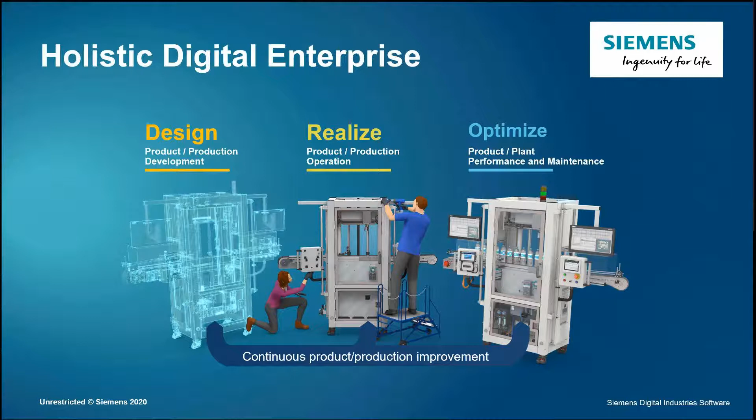We'll start with a question. Where can digital transformation take you? How can you use digital transformation to make your business more productive and more profitable? So there are typically 3 fundamental pieces to your business process. You have design, where you design the products. Then you have to realize those products, to actually make them through all the production phases. Then you have to optimize these products, typically in a long iterative process after you get them into the field. You also have to get data back and be able to figure out how to make these products better.

So these worlds that were kind of separate are gradually collapsing. Design, manufacture, and optimizing are all pulling tighter and tighter together. Think of the digital twin not so much as just a CAD digital twin, but also a manufacturing digital twin, where you take data back from the field in a tight closed loop and bring it back to help design and manufacture products better. This is what Xcelerator enables, the digital transformation. With the comprehensive digital twin at the core, the design, realize, and optimize we just mentioned, you have model-based systems, collaboration, and analytics to create this unique digital fabric, getting you to the future fast and predictably.

It's important to understand that Solid Edge is a lot more than a CAD system. Indeed, it's the best mechanical design system on the market, but what about the rest of the things you need to do as a business? Electrical design, simulation, manufacturing are

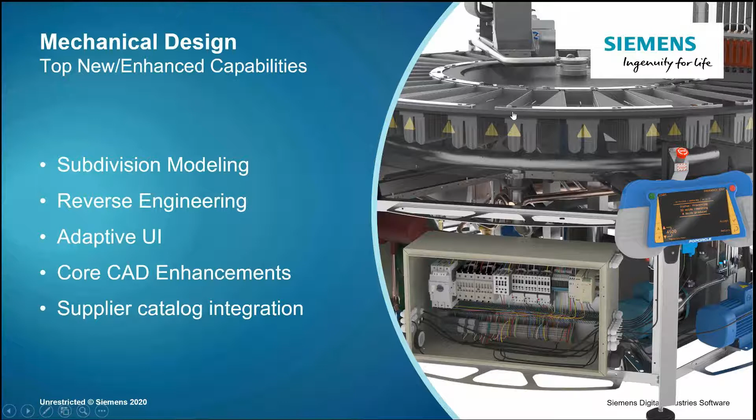So subdivision modeling, this is an amazing technology that allows anyone to create beautiful shapes. In the past, this was really the domain of a specialist who could handle NURBS and surfacing and all those complicated things, but now anyone can create these smooth and organic shapes. So let's jump into the Finamac machine and let's focus on the design of a portable controller.

Sub-D modeling enables you to develop distinctive organic shaped products without the need for expert skills and knowledge. So if you're not the best at surface modeling, for example, here's your chance to surprise your team. We'll start with industrial design sketches. We'll use these as a guide. So subdivision modeling can be simplified in 3 steps: the initial shape, the control cage to push and pull, and blend options.

We'll start here with a box shape and push and pull out the lower portion of the control cage. That gets a general shape of the controller. We'll start there. It's just a block, and we'll put in some starting dimensions. We can push and pull and get the general triangular shape of this controller. And after this, a split operation can be used to subdivide the control cage, which in turn gives us a lot more control over the shape of the body.

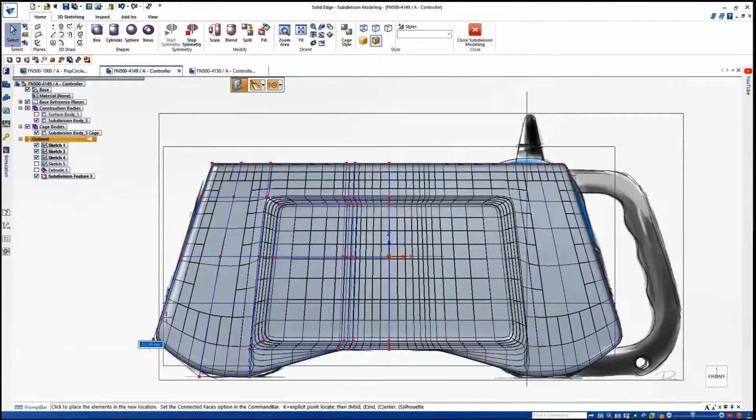Then, to create a cutout for the screen, a series of similar push and pull techniques are used to get our desired result. Many of the parts here need to be designed symmetrically, and to achieve this, we simply define a symmetry plane. Then, any edits made on one side of the cage are reflected on the opposite side, as you can see here. Anyone that's used synchronous technology in the past will be familiar with the steering wheel, which is equally at home here in manipulating the organic shape.

For the top notch of the part, we do a simple move face operation, which creates the geometry we need. And to keep track of what edges we blended and the value of each blend, we can show the blend values at any time for every edge and every vertex.

Well, we need to create a handle now. And we're not going to just cheat and pull something already done. What we're going to do is just do the same rectangular shape on the fly and see how easy yet powerful it is. Same as before, we'll grab an initial rectangular edge or shape, extend it, and then use a control cage to push and pull it into shape, followed by a blend operation.

Done. An important point we make here is we still use traditional Solid Edge tools, like the shape tool. We use that to split, and we can then grab those faces and thicken them. We can use Part Painter to color them so they stand out a little better. And you can still use any of the traditional solid modeling tools to further develop this model.

So we'll turn off some planes here, do some rendering, and within just a few minutes we've got a very complex model. Not bad. Now, I've been around the industry for a while, and I've seen what it takes to do this kind of modeling, literally days to do a model like that. To see it done so quickly, step by step in front of us, I think it's truly amazing.

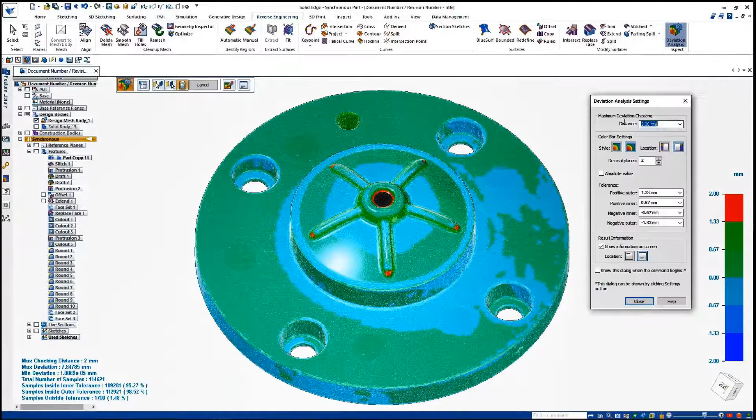So we'll take a look at this recent addition. There's a new Solid Edge toolset called deviation analysis. It allows you to measure the accuracy between the original scan and the resulting reverse engineered model, or even compare the two scans. The result plot color codes deviation for easy interpretation. Red means the test body exceeds the reference body, dark blue depicts negative distances, and on-screen callouts identify minimum and maximum deviation.

You can copy and paste this data for reporting later. Settings such as deviation range and result decimal places can be adjusted at any time, taking just a few seconds for the model to recompute.

So as you've just seen, there's some great new capability in reverse engineering. Deviation analysis can tell you how much the digital twin you've made from the real world product deviates from the model. Just as importantly, it's really, really fast now. Things that used to take minutes now take just seconds.

Adaptive UI. Now, this is a great new technology that we're pretty psyched to show you. It uses artificial intelligence to predict what you do next. How does it do that? It looks at what you've been doing in the past, at your patterns, and figures out what you might do next and presents those options to you. It's not just remembering your last 3 commands. It's really groundbreaking technology.

So keep your eyes on the top left of the screen. Solid Edge 2021 includes an artificial intelligence-based assistant in its user interface to predict the next commands you need based on what you're doing and where you are in a design. So for the Finamac machine, there's lots of sheet metal work. Solid Edge 2021 has learned from the design engineer, and rather than presenting tools that are commonly used across the industry, which would be good, it's presenting tools commonly used by this individual, which is excellent.

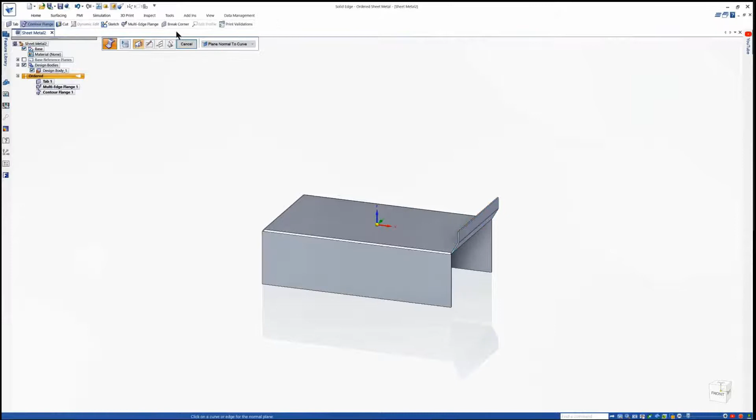That's right. So Solid Edge 2021 is now individually tailored to you. And what's more, it will continue to learn from you and dynamically improve how it holds your hand through your work day to day. What's really interesting here is watching it dynamically present the next selection of tools, even across different environments, as we go from sheet metal to sketch and back, presenting specific commands.

I said at the start to keep your eyes on the top left of the screen, and notice there's just one toolbar there. That means you can remove the other toolbars and maximize your workspace to have what you need right there, ready when you are.

So, as you saw, we're harnessing the power of artificial intelligence, and you can see how it can be applied to your daily work. It's personalized for you, it actually learns from you. What it does the first day of usage versus what it does after a week will be different because it learns as you go. Great thing about it is you can also share it with other people in your company. Maybe your process isn't the exact same as others, but you may have similar work that you all do. You can give them a head start in learning by sharing your piece with them.

In the area of core CAD enhancement, we have a lot going on. As I said earlier, there's no way we can cover the depth and breadth of Solid Edge 2021 in this short update, but I want to show you a few things that would be really valuable in the day-to-day work for the stuff that you do every day.

Let's jump back into the Finamac Popsicle machine. Actually, the name of this machine is Pop Circle. Get it? Anyway, first off, we're using large assembly mode to make the most of our computer's resources and to keep things performing as we'd expect. There's more to help with performance here too.

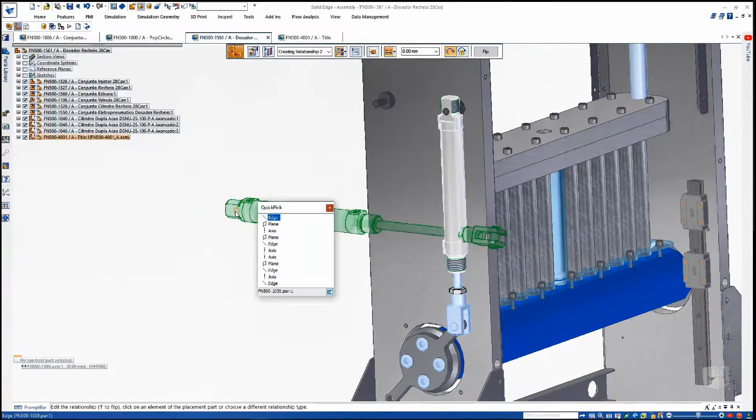It's common practice for suppliers to provide a 3D file of purchase items, such as a piston assembly. Using the new internal components option, all separate parts are contained within a single assembly file with no parts written to disk. This enables faster import times, especially on large data sets. Even though these parts are internal, they can still use traditional operations, such as taking measurements or analyzing mechanisms. Here we see the correct operation of the piston assembly with its internal components. Further, you can then assemble this as if it were a regular assembly. All in all, it provides increased performance and a lower consumption of system memory.

Reusing designs is even easier now. When copying and pasting multiple parts and assemblies between designs, existing assembly relationships are automatically captured and reused in the target assembly. A step-by-step process guides you through the operations to add assembly relationships needed to fully position the parts. All internal relationships come along for the ride. This significantly reduces time for these operations.

There's a new multi-edge flange command that speeds up the time when designing sheet metal parts. Multiple edges can be selected at the same time. Angles can be defined and miters can automatically be added. It's as simple as picking the edges and then pushing or pulling. In addition, partial or center flanges can also be defined, and trim options can make easy work of tasks that would normally require multiple operations, even when offset or gap distances are required. These sheet metal enhancements, along with many others, increase productivity and efficiency, being able to design parts faster and easier.

There's a new decal command. It makes it quick and easy to add labels and images onto parts. Simply select the desired image, define the desired size, and position it accurately using regular sketch relationships and dimensions. A decal can span multiple faces, as we see here. However, to change the position of it, you simply modify the dimensions or the relationships.

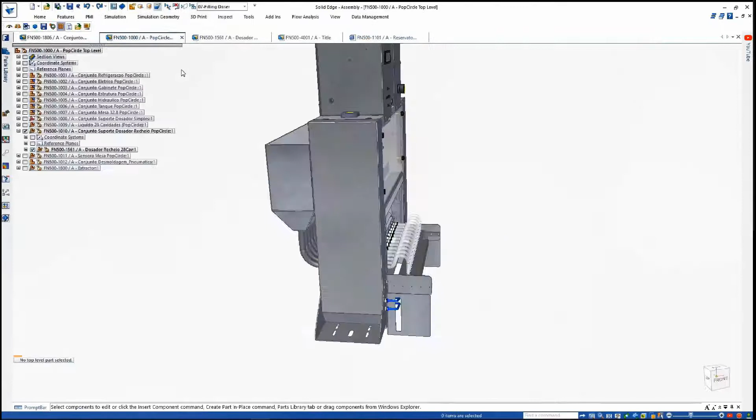Solid Edge 2021 also includes enhancements in frame design. Here we'll place a cross section which has coping applied so that it matches the circular cross section of the vertical frame. Now we can specify a weld gap between the frames, and this is especially important in generating an accurate cut length of welded frames in our parts list.

A new end caps command also allows quick definition of these types of parts within a frame. The single command now provides a wide range of options. Simply select the frame cross-section, choose the material, and specify the type, choosing from different types like inward or outward, or even define offsets that have chamfered corners. The end caps are reflected in the bill of materials, eliminating any additional work.

There's some truly great stuff in here, and this is just a bit of a preview. On large assembly performance, our customers are making larger and larger assemblies all the time, starting with a smaller assembly and getting bigger and bigger. Suddenly they're doing a machine, and the next thing you know, they're doing a small factory. We're keeping up with that, continually adding capabilities to go bigger and bigger.

Internal components—this is an awesome feature. Today it's used for importing parts, such as an engine block or engine assembly that has 300 parts in it, and you can add that to another assembly without worrying about all the individual part files, because you may not really care about those, and maybe they came from a supplier. The internal components technology will allow us to leverage this in the future to do more exciting things in coming releases.

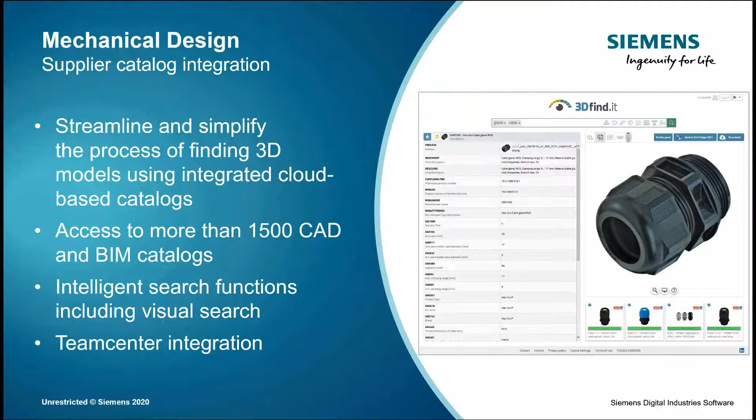The folks at Ditch Witch were very excited about this. The integration allows them to save a lot of time, not having to build parts or rework parts, and just simply use what they already have.

There's a lot of other stuff here in mechanical design, more than we could possibly cover—we'll invite you to look at it more deeply. But Solid Edge is not just for mechanical design. As we were talking earlier about the digital twin, you should really look at your business and think, not only how can I be more productive with mechanical design, but how can I expand my efforts? Can I go further in my production process, or can I go sideways into electrical design? What ways can I become more productive as a company by using the tools that enable digital transformation?

There's a lot of talk about electrical design. First is wiring design—it's a really important thing coming here in Solid Edge 2021, and that's cabinet and panel design. It's a different thing when you're wiring a tractor or a car than it is when you're creating industrial control panels and cabinets that go into the machines that you design.

We have a full complement of tools here. We're going to check these out. So here we are in Solid Edge wiring and harness design.

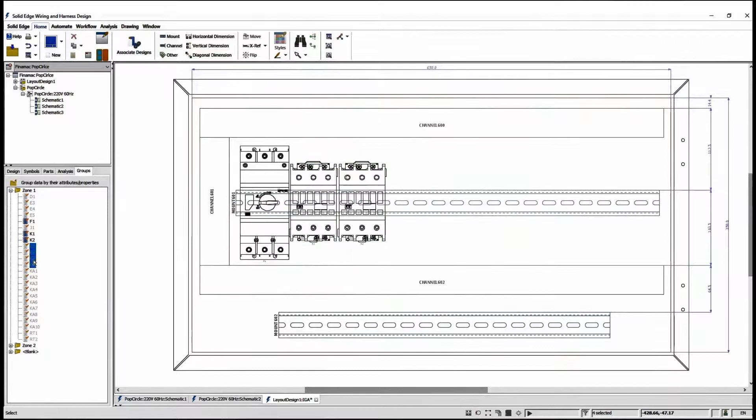We can place single objects or multiple objects at the same time, and shortcut options also allow control over snap points, rotating angle, and the order of the placement, and more, all of which are dynamically previewed during the placement process. The last few devices are placed in the top and bottom rails quickly and easily.

A bill of materials, which is customizable, has been automatically built, and we've added the devices to the layout design. A bill of material IDs can be generated with balloons.

Finally, for the panel is a terminal plan, which assists in the assembly and wiring of the terminal strips. The fully associative terminal plans are automatically generated, documenting the terminal blocks along with their specific symbol, physical sequence, and the strip, and the details of where the wires terminate to both ends of the block.

Now that the electrical design and documentation is complete, we can finally share this with our MCAD team. The connected mode makes it easy for the ECAD and MCAD worlds to collaborate.

Switching to Solid Edge 3D CAD, we can see the existing wiring details that have already been added to the design. With the connected mode active, we can cross-highlight components between the two disciplines.

We'll bridge in some of the final conductors to connect the two cabinets together. We can bundle these wires together.

And to keep the bundle neatly organized within the assembly, there's a new route-along-surface command that provides a very efficient way of routing the bundle path around the contours of the frame.

All that's needed is to pick a bundle to be routed, selecting the faces of the geometry the bundle needs to follow, and plot some points along to define the path. Then route the ends of the bundle through each of the glands to the respective cabinets.

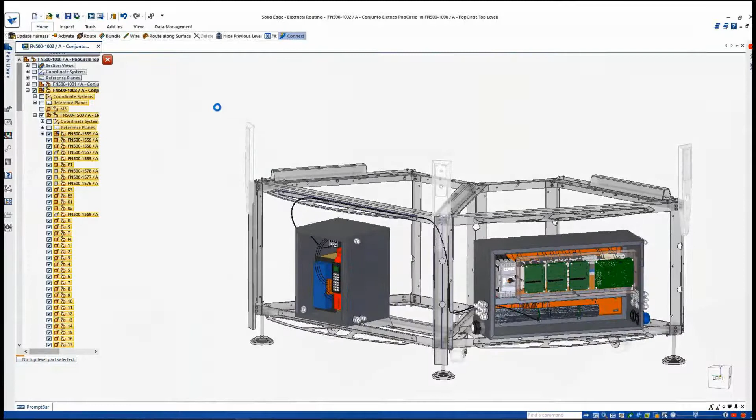Just watching that is impressive. The amount of productivity you have in terms of laying out the cabinets and panels is pretty remarkable.

If you're working with something that's using a more manual technique, you're going to find that this will add some serious productivity to your day.

What you saw there, first of all, is that customizable table-based interface for the device snapping to the rails and so on. We didn't get a chance to look at it, but there's also an auto-routing capability for schematics that will save you a lot of time.

And of course, it's all upward compatible to the Mentor line of products. We got a glimpse of routing along irregular geometry. It can even be a sculpted shape, maybe something you did in subdivision surfaces.

Connected mode in electrical routing has also been extended. And that's not only working with Solid Edge wiring and harness design, but it also works with Mentor Capital software. And finally, we have an integration to other third-party products as well.

In the area of harness design, to be clear, when I talk about harness design, I'm not talking about the 3D efforts that mechanical engineers might think of. Harness design is also something you do in 2D. How are you going to lay out the harness for production? When we talk about harness design, that's what we're talking about here.

You have the ability to visualize this in Teamcenter as well as tie it back to requirements. It enables tracing of the requirements themselves. And it also allows interactive routing for the full signal path.

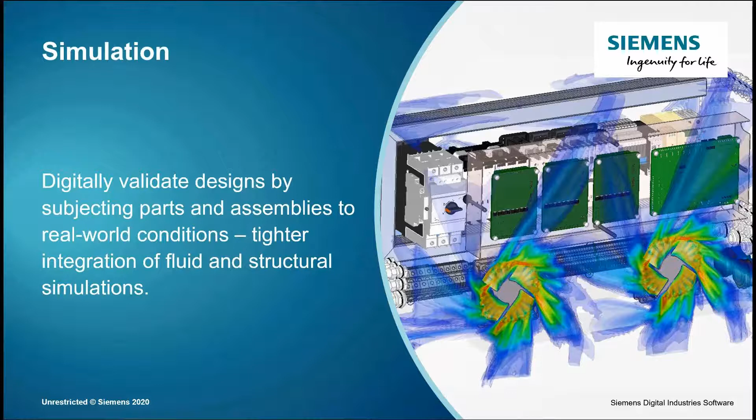Next up is simulation. And of course, there's a lot going on here. We have products for stress analysis, modes and vibration, all sorts of different things, and flow analysis. You're going to see some great integration between our structural and flow products happening in Solid Edge 2021. So back to the popsicle machine. Simcenter FloEFD for Solid Edge features new capabilities and modules for electronics cooling applications.

The new package creator specializes in the rapid creation of accurate thermal models of electronic packages with correct definition of chip layers and solder balls on the chip. Here we can clearly see the thermal effect on the PCB board and in turn its effect on the overall electronic enclosure. Looking at the flow trajectories around the fan, this shows how the fan swirls the air and pushes it to the side to cool the enclosure.

We can also see how the fan is performing along the fan curve, showing the operating point of the individual fans based on the fan curve data from the manufacturer. So ISO surfaces are another way of illustrating where the airflow is going and showing the velocity and the volume plot. In addition, Solid Edge 2021 now has the ability to apply the results from a computational fluid dynamics study as input to a Solid Edge structural or thermal simulation study.

Focusing on the tank containing the liquid bath that freezes the popsicles, looking at the results of the thermal flow study, we can see how the cooling liquid interacts with the assembly. And these results can be sent to Solid Edge structural simulation by using the export results command. So let's go to the structural analysis setup. Also new in Solid Edge 2021 is the ability to suppress and remove any components directly from the simulation pathfinder, making it easier to test the design on a subset of study geometry.

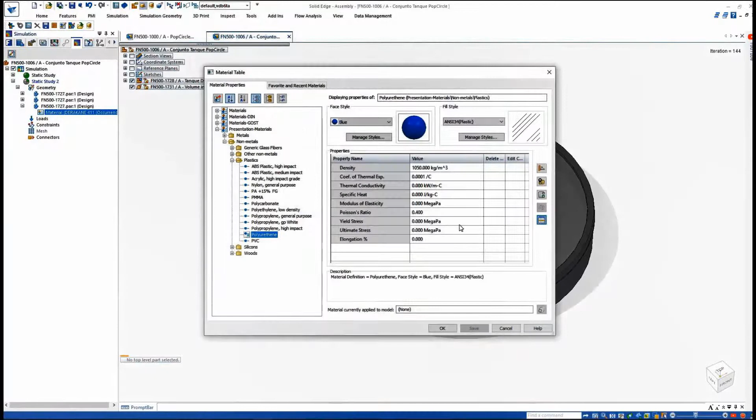When defining the material for the insulating core, another new feature is the ability to highlight key materials that are required for the study we are attempting to solve, as can be seen by the green coloring. It makes it easy to ensure we have appropriate properties defined for an accurate study. The last step before solving our structural study is to import the FloEFD pressure or thermal results. These are automatically applied directly to the correct bodies and faces in the study.

In the result, we can see the pressure from the cooling liquid is causing the highest areas of stress on our design. And it doesn't stop there. New for Solid Edge 2021, the ability to probe edges, ultimately saving time in having to select each individual node.

Like I said, I've been in this industry a long time, and I'm still amazed at some of the things that I see. The features around flow simulation, the integration with the stress simulation, is just utterly amazing. We continue to enhance the Solid Edge simulation in many ways, improving the interaction with the materials, making it easier to remove components from the study, being able to probe the geometry more easily. But really, that ability to tie the flow and structural together, that's impressive. We're able to take the information from the flow and read it directly into Solid Edge for, let's say, stress analysis.

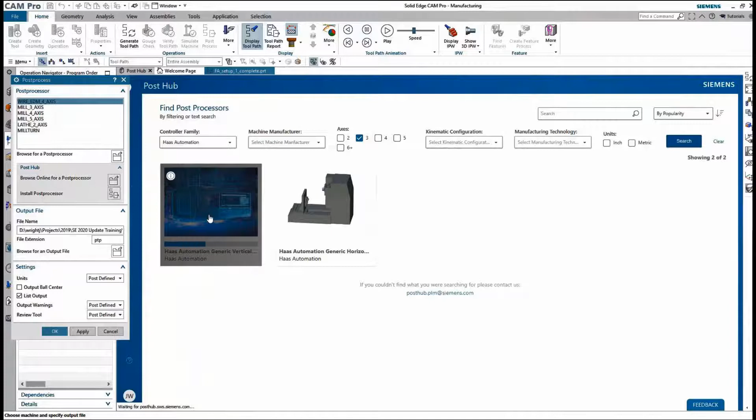With new posts added regularly, the Post Hub is searchable with filters for machine type, manufacturer, controller type, and kinematic configuration. Once the desired post processor has been selected, it can be automatically downloaded and installed, and verifying the post output is simple.

Solid Edge CAM Pro now has multi-axis roughing, which is a great tool for quickly removing stock from aerospace parts, like the one shown here. Multi-axis roughing uses adaptive roughing technology to machine parts in the most efficient manner. Viewing the multi-axis roughing path in replay mode allows visualization of the tool axis tilting as the cutting tool removes the material. The 3D dynamic simulation option shows the tool motion and concurrent material being removed.

Now notice how the multi-axis roughing efficiently removes material without ever burying the tool in the cut. That's obviously extremely important for efficient machining. With machining simulation, users can view the actual machine motion, which delivers a very high confidence level and is necessary for complicated multi-axis machining centers. Solid Edge CAM Pro supports G-code-based simulation, meaning the virtual machining center is acting upon G-code just like the real machine would.

We continue to push both additive and subtractive manufacturing forward. You can see in the new Post Hub library, getting access to proven posts for your CNC machine tool has been a constant industry issue, and it's much easier now with the Post Hub library. You also saw multi-axis roughing, and that's really state-of-the-art stuff. We've also included some things in additive we didn't get a chance to look at, but we are providing better material selection for your printing needs, and bringing various additive checkers into one comprehensive additive checker makes it a lot easier to interact with.

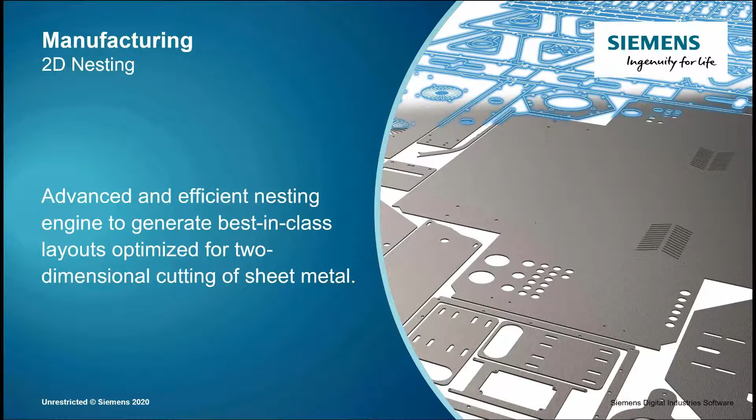Oh, back up here. Another part of manufacturing is nesting. A lot of what you do is sheet metal. We talked about sheet metal earlier, and the ability to lay those sheet metal parts out in the most efficient way possible. We have the most efficient algorithm in the industry for doing just that, and we want to talk to you about some of these new enhancements in that area.

If your machine looks like this, consisting largely of sheet metal parts of varying materials and thicknesses, you'll really benefit here. So jumping in, Solid Edge 2D nesting can now search the complete assembly for appropriate sheet metal documents, automatically sorting the parts by material, type, and thickness. By selecting the material type and then thickness, you can quickly make patterns for multiple jobs, enhancing shop floor efficiency. Flat patterns are then automatically extracted from the parts, saving valuable time.

The assembly occurrence now automatically defines the part quantities, while the job multiplier quickly calculates the amount needed to manufacture multiple machines. Solid Edge 2D nesting supports multiple sheet sizes. Standard sheet sizes are stored in the library, and you can easily define your own custom sizes. And here, Solid Edge 2D nesting is doing its thing, finding the most efficient use of material. Savings in the material costs are also gained by the highly efficient algorithm and could quickly offset any of the software investment. And last but not least, 2D nesting has a quick cost estimator.

From user-defined costs per square meter or yard, 2D nesting quickly generates an accurate cost of material that is needed for job cost accounting, quoting, and inventory processes. 2D nesting is a great opportunity to improve your sheet metal process while saving money. As I said, it uses the most efficient algorithm in the industry, and we've enhanced it to deal with odd-shaped sheets, like in the upper right corner here.

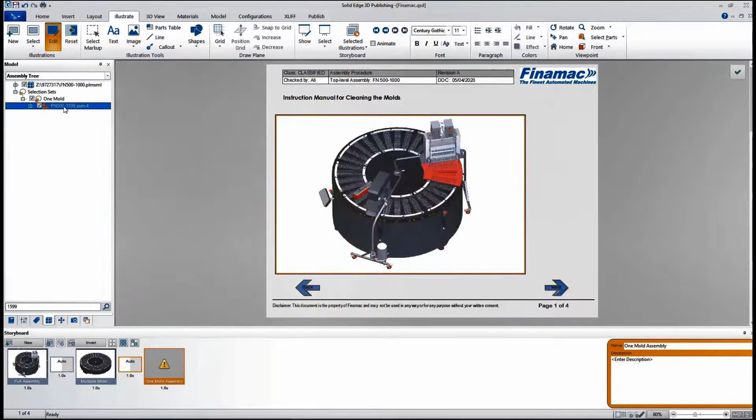The new selection capabilities in Solid Edge TechPubs allow for the organization of groups and parts and subassemblies into named sets, making it easier and faster to select or hide multiple parts at the same time. Here we'll focus on a single mold assembly and build a document that describes the cleaning process. The new View Carousel function makes it easy to navigate through the illustrations with a storyboard.

Creating an interactive view is fast and easy. Here we can accommodate multiple 3D views on a single page. Selecting a part on the right displays the view on the left. The next page includes step-by-step instructions for cleaning the mold assembly.

The best way to visualize the process is to mimic through the exploded view with dynamic text-based boxes providing instructions. Adding buttons to step through the process is made quick and easy by using the new manual markup resizing options. Now, not only can you import all native Solid Edge exploded views, but you can also create custom exploded views within Solid Edge technical publications.

Adding an interactive parts list is as simple as drag and drop. The parts table is automatically displayed based on the 3D model's metadata or properties. A new powerful and versatile parts list editor makes it easy to customize the table, and adding an illustration allows us to quickly switch between the collapsed and exploded views of the mold assembly.

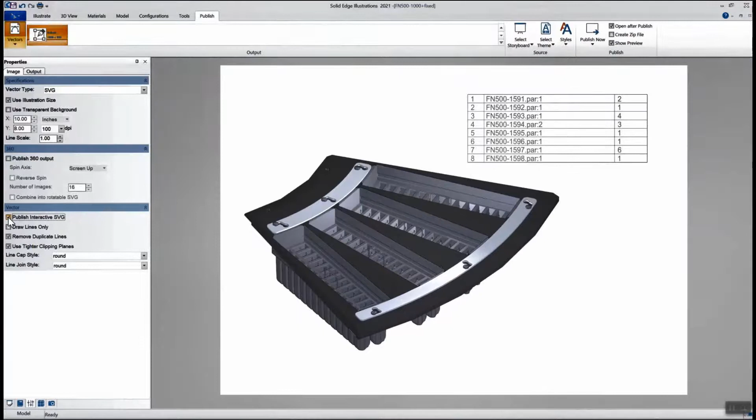The project can be published in industry standard formats such as 3D PDF, and in this case, HTML5. The rich interactive document can be viewed on any web browser without additional plugins. With the new 360-degree publishing, get an all-around view of your product. The automatic functionality allows for more robust presentation of your design, a great way to capture images for product and stakeholder meetings.

Clickable SVGs is another new feature that allows us to publish an illustration with interactive SVG, scalable vector graphics format. When a part on the model is selected, the corresponding row in the table will also be highlighted. And furthermore, being SVG, it's very crisp and very clear.

With technical publications, we see that you can take advantage of your data, the data that you have today. Customers have generated literally millions of parts, some upwards of 15 million parts, and the ability to use that in your technical publications directly is very valuable. We have faster performance now integrated with Teamcenter as well. And what you saw are some great new features, the carousel page object, the 360-degree publish. All of this is great stuff in Solid Edge 2021.

This leads us, of course, to data management. As I say, you've generated a lot of data. Whether your company has 2 seats or 200 seats, we have you fully covered with our scalable data management solution.

So let's take a look at the new concept modeling workflow using the popsicle mold. The concept modeler is a space where a designer can explore new ideas without committing the files to Teamcenter. It's a sandbox where you have the freedom to make any changes to a design without compromising the existing models. Here, we'll create 2 concepts of our design.

Going back to the concept assistant, we can switch the concept and open the design data. Here we can assemble the different mold retaining components for this idea. Once the concepts are finalized, the data can be sent to Teamcenter. The concept assistant helps with this process and provides options to filter for new or modified components, or even revert any changes that were made.

The 3D Compare tool allows us to quickly visualize the changes between the concept and the server versions, and the user has full control over the actions for any modified component. Once everything is defined, the data from the desired concept is seamlessly sent back to Teamcenter.

Also new in Solid Edge 2021 is the integration of Solid Edge model-based definition content. Now, the downstream manufacturing information included in the MBD PDF output is automatically captured by Teamcenter and visible within the item revision of the part assembly.

In Solid Edge built-in data management, there's a new Open As command that allows users to control exactly how a file is opened from either Windows Explorer or from the most recently used menu. This allows full control over how an assembly is opened, such as defining the correct configuration, setting read-only status, applying large assembly options, and much, much more.

There's a new shape search capability that allows designers to more efficiently reuse existing models and prevent recreating designs from scratch. You can simply use an existing part or even model a basic representation as the basis of shape search. Solid Edge scans an available database for similar looking parts, and filters are available to approximate the match criteria.

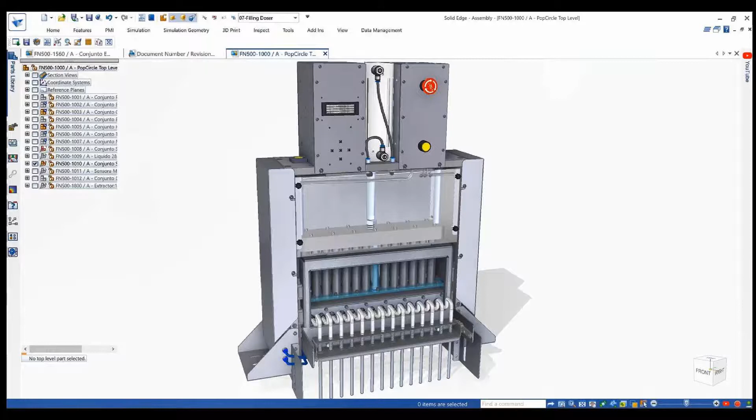First up, there was Shape Search, a new product that allows you to reuse the data that you already have, and there's nothing more inefficient than recreating something you've already designed and built. But you've got hundreds or thousands of parts, or maybe even millions of parts, and how are you going to know where they are? Well, the way you're going to know is through Shape Search.

We've also enhanced Pack and Go, which is a very popular Solid Edge feature, allowing you to trace links even outside the current context. The Open As command is super handy, and it may not be super obvious at first. For example, if you want to open an assembly with a certain configuration, you can do that easily from the file manager. This is good stuff for everyday use.

Inside of Teamcenter, the concept modeler is really great new technology, such as being able to make changes to try out what-if scenarios without committing to the part number or deciding if it's a brand new part or just a revision of an existing part. Wire harness and alternate position assembly can now be visualized in the Teamcenter portal. And the local component support of Solid Edge is fully integrated into Teamcenter as well.

Next up is cloud-based collaboration. More and more, we see our customers around the world having to collaborate across their businesses in different locations, and collaborate with customers and suppliers. The cloud really enables this. There are really some very cool new capabilities in cloud-based collaboration. So let's take a look.

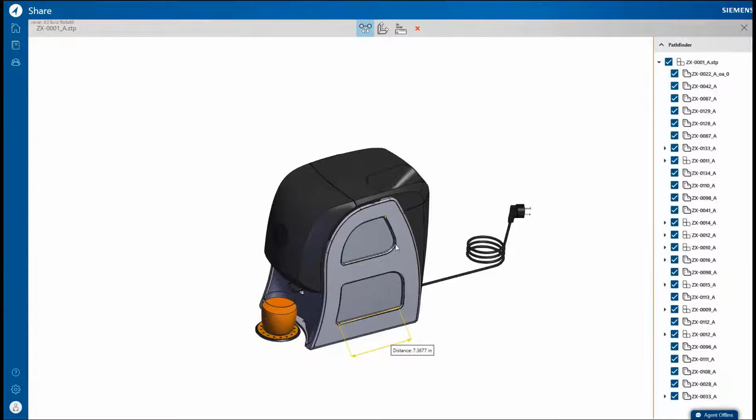Notice how easy the interface is, what we call non-technical. So it's not just for design engineers. It could, for example, be used in a sales situation, and it's nice and easy to get to any of the product features. Here we're taking measurements on the fly, and we can also change the units on the fly as well. And in this interface, you can also add markups or commentary. There are some tools to do some redlining.

We can choose pre-selected shapes, or do some freehand sketching over the top of the 3D model, and include text annotations as well. Any of these markups get recorded in the tree. What's great is you can start a conversation back and forth about any issues you're tracking, whether positive sales points or manufacturing difficulties. It records the markup and the time when it was made.

I talked about getting data into your cloud storage. We looked at upload into the browser. Also available is desktop synchronization. This multi-CAD project we've got on our desktop is represented simply as a folder. Any data we bring into this folder we can drag and drop in, or just save it right from Solid Edge. This will get synchronized in the background as you work in the app.

Another great capability of this app is sharing with whomever you like. It's nice and easy, just type the email address of the person you want to share with. You can choose the access permission or access level you want to grant. For example, you may choose to view and download, or protect your intellectual property.

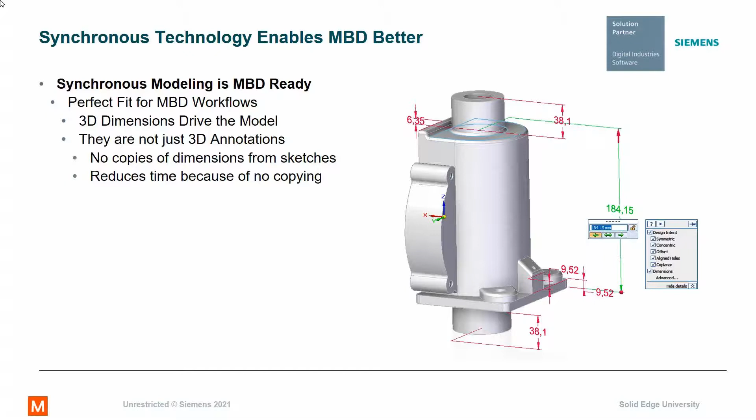So of course, any changes to the 3D dimensions are reflected in the part model. Very, very tight connection between the dimensions and the actual model.

Now for you that are still working in ordered modeling, maybe the products you design are more suited to that, and that's okay. Or if you just haven't made the leap, you can use copy PMI in the ordered modeling environment to create an associative copy very quickly of those sketch dimensions, and they become PMI dimensions. You see they have a purple color, but what's kind of nice is that the PMI dimensions can be arranged more visually pleasing, more appropriately, while the driving dimensions - typically you're most interested in just simply driving the model. You're not really thinking about making it human readable. So it's kind of nice to actually have them separate.

And you see that the tolerances also retrieve really nicely. So it's one and done - you do it once in your sketch and you can very easily retrieve just the dimensions that you want for PMI use and model-based definition use.

So now we'll do a short demonstration just showing some basic PMI modeling. All right, let's take a look at some PMI, product manufacturing information.

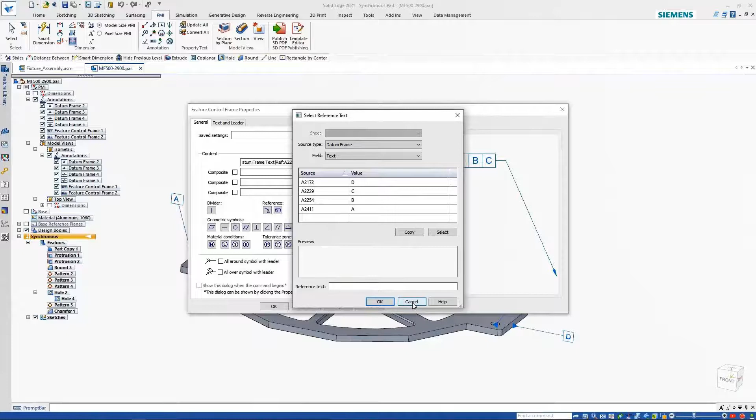We have a feature control frame, and if we touch it, you'll see that all the datums highlight. That's because there's associativity - when the datum was created, they used this reference text, and now that's in drafting, and it's also supported in part modeling. So essentially it offers you all the other annotations that are in the drawing that would make sense for a feature control frame. And the bonus is, besides the fact that it sees all the associativity, if you ever make a change to one of these annotations, it's reflected in the feature control frame immediately.

You might have noticed that change to a D. So you don't have to remember to go and update, and you don't have to take the extra time. It's much better than manually typing these datums into a feature control frame.

I'll hide my PMIs. There's a really nice capability where if you touch a face, working in Synchronous, it exposes any dimensions attached to that face, which is great. You can also right click on one of these dimensions once you see it and add it to a model view, or remove it from a model view. So you don't actually have to go find it here. If it's not displayed, that's just natural behavior of Synchronous modeling.

One thing I noticed right off the bat is that these are just cylindrical cuts. They're not actual holes, which isn't probably the way I would do it. I like to have real holes with real data.

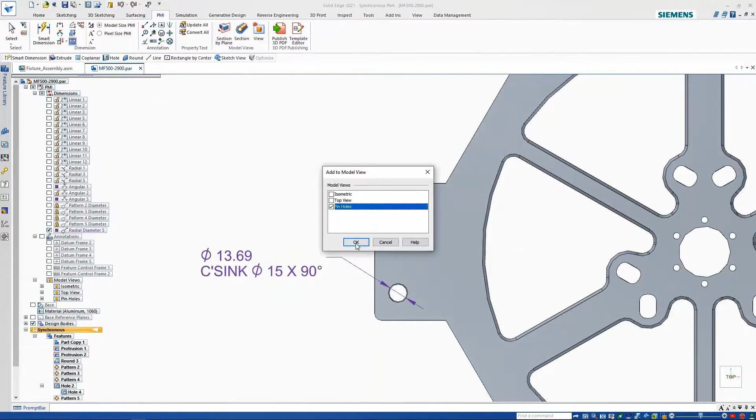And if I apply my Pin Holes, it takes me there. So super easy. And remember, you can just touch a face. If I want to include this, I just add to model view, pick the Pin Holes, and it's added to it. I'm going to turn it on. This is a little ugly, so I'm going to move it. Maybe I'll put it down here. So now that will be part of the model view. And if I apply the view, you can see it's just that easy.

So that's the first demonstration, a little taste. We'll talk about publishing and the template editor in the next movie.

This is the interoperability demonstration. You can transfer PMI data from Solid Edge models. It will happen through a PLM XML adapter if you simply open a Solid Edge file directly. And there are some settings that will impact that as well.

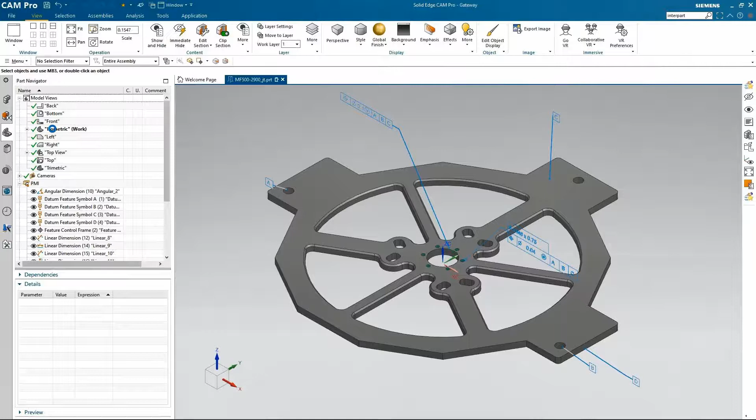And even though they don't display initially, they are also here in the PMI collector, and they're gathered into the model views, almost the same as Solid Edge model views. So if we double click the isometric, there's the PMI that we had in Solid Edge. Here's our top view. So very, very similar, very good interoperability between Solid Edge Cam Pro and Solid Edge itself.

Solid Edge continues to build on what's been in the product for a long time by adding MBD. A nice capability is the way reference faces can be selected and attached to the callout, or in this case, a feature control frame, so you are sure as to just which geometry the annotation refers to.

PMI is supported in STEP now as well for foreign export and import. And of course, PMI has more than just text. It's got data in it that can be leveraged in Solid Edge Cam Pro to help you manufacture your parts.

So MBD is a set of tools that add on to Solid Edge, a little bit different than technical publications. Tech pubs are usually used for marketing and manuals, so they're a little richer, but this is a great way to create documentation for things like manufacturing. It is a purchasable upgrade for Solid Edge, but it's very easy to use.

We have a couple of buttons here for publishing and your template editor. Publish is super simple, creates PDF or HTML5. Template editor is basically Solid Edge drafting with a few controls that are specific to PDF navigation, so there's no need to learn another application.

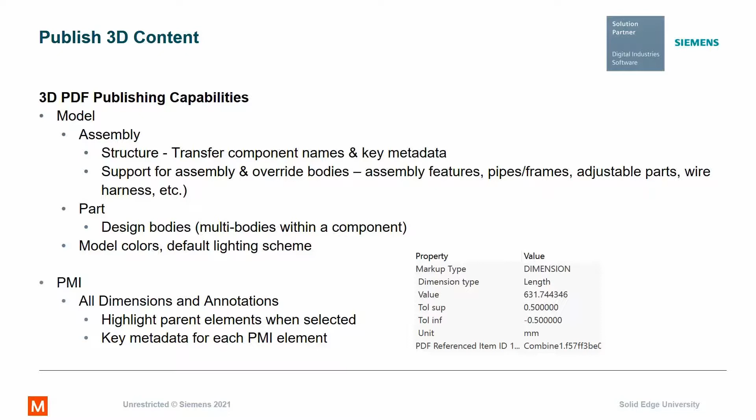Let's take a look at Solid Edge MBD. Maybe I'll go ahead and create a feature control frame. I've clearly run through this once before, but I have a true position to B. I've used the reference text, so it's going to be intelligent to the B datum. And remember, we talked about this reference geometry, so you can have more geometry than just the one.

Roll up on that a little bit so you can see it better. Picking the cylindrical faces and then just accept, and then the face where I would like to attach my feature control frame. So if I get that done and I escape out of it, when I come back and pick it, you see not only is it highlighting the datum, but it's highlighting the faces as well. So it's very nice, and we'll add that to the model view all and hit OK.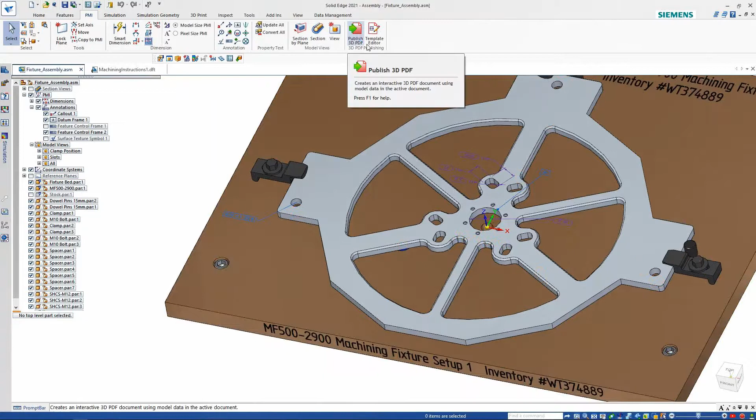And go ahead and save that. So to publish it, it's super easy. You just click the publish button, but if you wanted to make a template or edit a template, you just click the template editor. And really it's Solid Edge Draft, except you have a number of extra controls here.

You have a 3D view, carousel for navigation, your bill of material, table, generic table, and a text input field. So this is the one that I made a little bit earlier. There's my 3D view, there's my BOM table. I don't think you need to see me kind of drawing these and organizing them. So there's a simple callout that I added, and a callout with property text. So very easy to use.

I'll just choose to not save that, and I'll abandon the creation of my template. But right from Solid Edge now, I could choose publish template. My machining instructions template is the one that I want to use. So I just select that. I wanted to open the PDF, not interested in HTML right now. I think I want the 'all' to be the default view, and we just choose publish.

And we'll go ahead and overwrite that one that was there. Runs pretty quickly, and we should see a PDF open up with my custom template. So there we go. And if you use your navigation down here, there's the clamp position, there's the slots, there's the all, there's my highlighting of the clamps and the stock. There's the actual part and a number of other views.

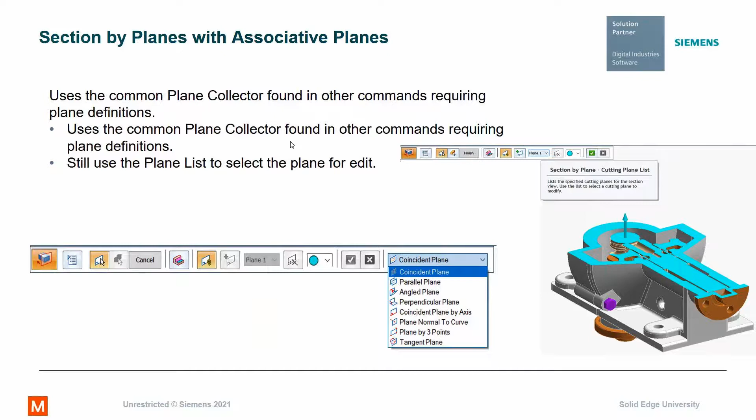So in the last demonstration, you saw a little of the section by planes with associative planes. Very easy to use, nice addition. They land in the planes collector found in your Pathfinder. You can see you can use multiple plane types. So these can be associative or non-associative. You can select which parts get cut. You can have multiple cut planes. Very nice.

Center mark annotations in PMI, of course, just like you have in drafting. So we need that same functionality for model-based definition because we're essentially creating a paperless way of communicating the information. Supported in the 3D publish, of course, and you can dimension to them if you like.

Bolt hole circles, yet another thing that we have typically had in drafting for a very long time, is now available also as a PMI annotation and can be inserted into your model views, just like in drafting, and also supported in exporting in the translators. Center lines, very similar, and well supported as well.

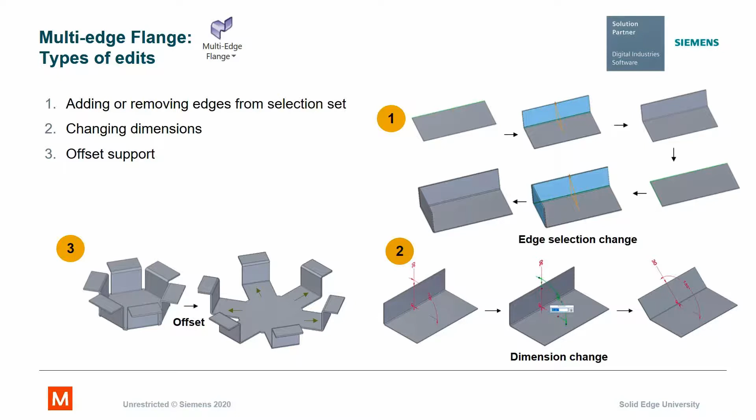I'll show you this in the demonstration. Again, really easy. Select your edges. Can be a chain if they're all contiguous edges. And offset is supported as well. Corner treatment. Good example there. On the right, simply editing the options dialog as you'd expect with sheet metal design.

And the ability to automatically trim if they intersect. So that is nothing more than a single click. And if any of the flanges intersect, it just automatically trims them. No guesswork, no clicking around. Just if they intersect, they get trimmed. Supports coplanar and non-coplanar, as you'll see in the demonstration.

All right, notice I'm in the ordered mode. Multi-edge flange is right here. We'll just select the edges. You can easily hold the shift key down and deselect if you misclick, because we have radii at the corners. You see it's super easy to just play with your command bar like you're used to with the traditional flange command. Very easy to discover.

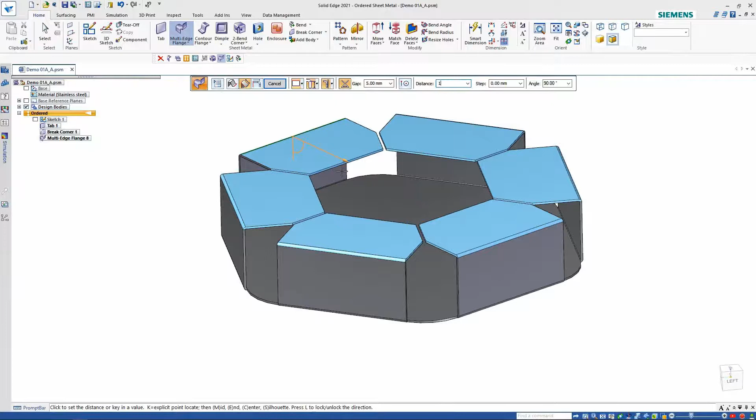I want to show you how the intersection behaves in the automatic trimming. I'm just going to right click and move in. So whenever you have any intersections, it's a simple single click, super easy to do. Maybe we'll give it a little gap. Also super easy to use, and that pretty much covers it. Certainly change the angle after the fact, all parametrically driven, completely editable.

There you go. And we have one more short demonstration regarding multi-edge flange. Another small example of multi-edge flange command will grab an entire chain. This makes sense when there isn't a round break edge in between. And let's give this an angle of 135.

So maybe 45. So the overlap is a little bit different than the previous part, but it works just as well. Just works as expected. Super easy. And then for another example, we could actually edit this, but let's just delete it and do another one fresh.

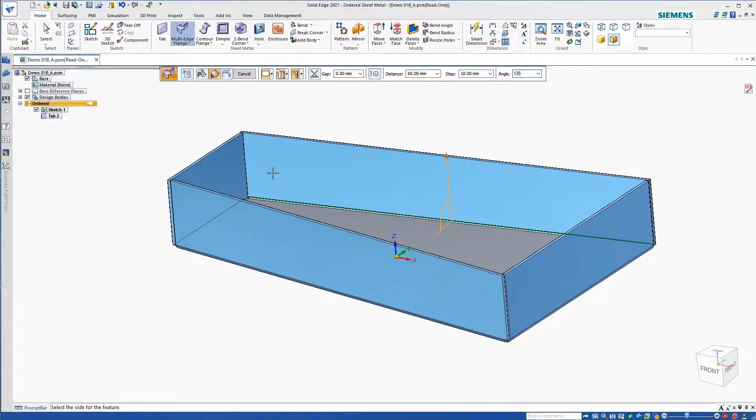Again, I'll use the chain and just right click. It'll come up. 60 is fine, but this time we'll actually do 135. And if we would like to miter that, it's just a matter of one checkbox to turn on the mitering, and that is done.

Next up, what's new in assembly design? Assembly internal components. So for Solid Edge 2021, they now support internal components embedded in the assembly file where there is no file on disk. A little bit of a mind bender at first. Data resides completely within the assembly file, so you could potentially have one file that is your assembly.

You'll have an internal components collector, a little folder-like object in your Pathfinder, compared with the legacy, you might say, traditional workflow where components are external and they are files on disk. And the assembly merely references those external files. So assembly files are typically very small.

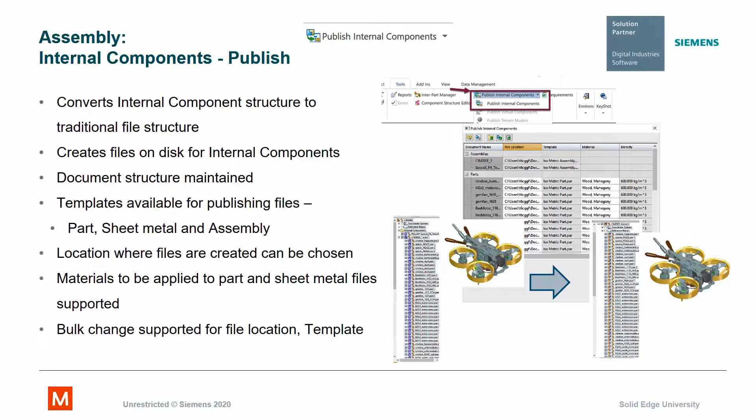Performance is a really major improvement, significant improvement with internal components. The speed, just the sheer speed of the importing. If you would like to eventually create external components, there's a publish internal components command. It then creates the files on disk. Structure is maintained. Choose your templates, where the files will land, and the materials applied. Conceivably, you could have both. You could publish a few for some reason.

What is really amazing is that you can create assembly relationships to these internal components as if they were external components, and it will control the position of them. And also, you can do a mechanical analysis with the drag component command without having to have the external files. So this may be good for prototyping or just an initial concept or whatever you can imagine. So just really nice capability that's also available with internal components.

And drafting. You can create a kind of a thin parts list because the files don't exist on disk. They don't really have a full set of property sets, but things like file name, your quantities, item numbering, those are available because they do exist within the occurrence of the internal components.

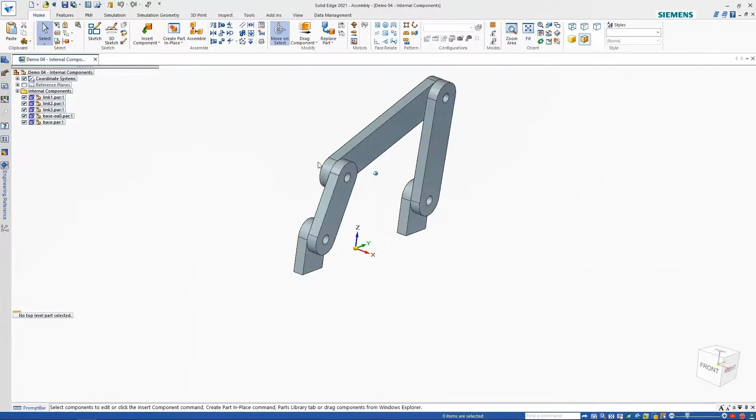Metric assembly is what I want, and just follow through with OK. You should enjoy much faster open times because it's not creating all these external files, but you see it looks very much like an assembly structure here. The icon color is a little bit different. If you right click, you certainly don't see file properties because the files don't exist except for this one ASM file, at least currently.

You may want to use your assembly relationships. Currently, these components are just grounded in space, but this is a good opportunity to talk about some other functionality that isn't necessarily related to internal components, but just a little reminder. Don't forget about your assembly relationship manager. This is a great tool for analyzing relationships, maybe if you have a failed relationship or if you just want to manage them in a different perspective, the perspective from the relationships rather than the component.

And I just used it to remove the ground. This wasn't actually really necessary, but just a good opportunity. Now, this is a great application for the Assembly Relationship Assistant, which will create relationships, especially good for foreign files because you typically don't get relationships. So I can select everything and go to my options and have it just create relationships about everything.

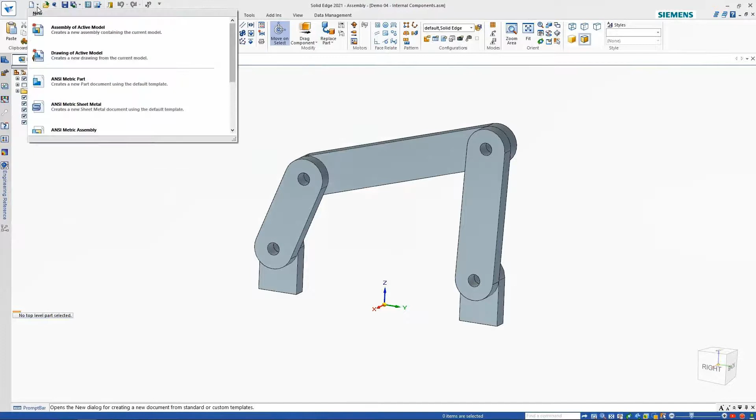So now we actually have assembly relationships on these components, and this can behave very much like an assembly without having to have those external files. You could do things like collision analysis, drag components. So very cool addition in Solid Edge 2021. I'm going to go ahead and save this assembly and just show you how you could, of course, make a drawing very quickly. Create drawing of active model.

We'll use an ISO draft template, and because it's an assembly, it creates this ISO view if I don't use the drawing wizard, and even a parts list to some extent, because we don't have files with a lot of individual attributes like material yet, but we can still get a parts list of what we do know about these components. So that's really cool capability.

And if you do want independent components, it's not a dead end. You can right click and publish these internal components. It's also available on the tools. Actually, if you ever do forget, you just come down here to your command finder and type publish. So there's the publish internal components. You could run it from there as well.

And this is a great opportunity to assign materials. And I'm just going to take the lazy approach and copy and paste that down through all of those. And it's just going to make independent files now. So we go ahead and hit publish. And you'll see this turn into what you would typically see as individual components. And we'll save that and make sure everything's all updated.

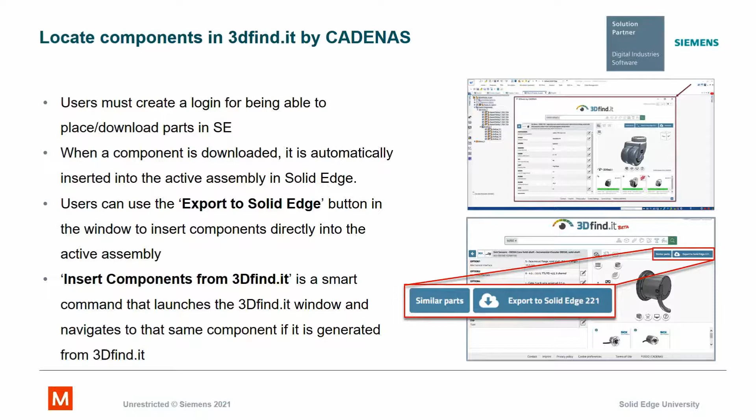Okay, let's take a look at using the insert component from 3Dfind.it. When you first launch it, you may want to log in. You can create a free account. You'll see there's a number of large tiles here, or you could use these buttons here at the top. We have an indexed search, a geometry search, which is super cool. We'll take a look at that later.

You can actually draw some shape. I'll show you that. There's a little color search, or by primitive geometric shapes, or let's see, what else do we have? Parameters. We'll be using the text. There's also a function. So in this case, we need a cable gland. So we'll search for that.

And we can append maybe our standard to narrow down our search. So we want an ISO standard cable gland. You see that there's a number of catalog suppliers over here. We'll just grab this one from ABB. Really nice viewer. The magic of modern web browsers and HTML5.

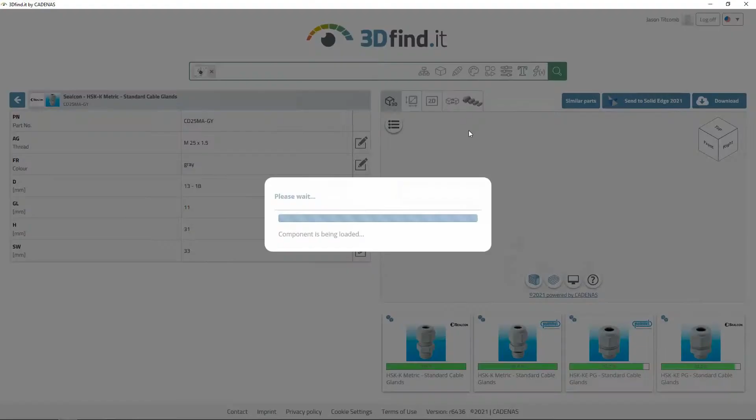So I've narrowed this down to the Sealcon, and I don't want an NPT. We want this metric. So once you found an alternative, you'll have this really cool ability to compare. In this case, I may want to look up by the thread. I know that's a pretty big hole, it's a 47 millimeter hole, so we'll pick a 40 millimeter thread. And the comparison tool allows you to confidently compare your choices. And then once you're confident, you can just bring this down to Solid Edge.

And we'll just use standard assembly techniques. We'll flip that over with the F key. Use our quick pick to get the front side and the face of our cabinet. Super easy. Let's see if we can find a grommet for that. So we'll insert component, the 3Dfind.it. Maybe a cable grommet might be a little closer. And pretty quickly assemble that using a couple of edges.

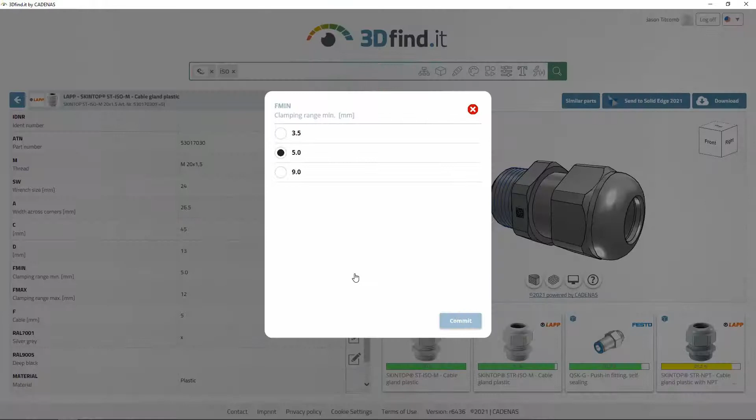This is an opportunity to look at the shape search. We happen to have a STEP file prepared here. You can see the file types that are supported. I'm going to broaden out the search a little bit. Let's add our standard in combination with the shape search. And this looks like a good match. We'll grab that. The clamp range is small, and we'll send it to Solid Edge. So this is pretty much the same. We'll get this a little closer.

Next up, a little attention to the frame environment, adding weld gaps. That's been added in the global options and also right on the dialog, the ability to set a gap where the frame members meet each other. So apparently this is a thing. You want a little gap there. I'm suspecting it's for weld penetration or for shrinkage compensation because of the effect that the weld has on the joint. Nonetheless, it's been added to the software. The cut length is affected, of course.

End caps for your frames. Some good examples in some images. We have a demonstration on this as well. Very easy to use, nice graphical dialogue. Everything you should need for your typical end cap for a frame, so you don't have that nasty open end of a steel tube. It can be safely capped off. It supports inward, outward, inset. They are reported in your parts list, different thickness values.

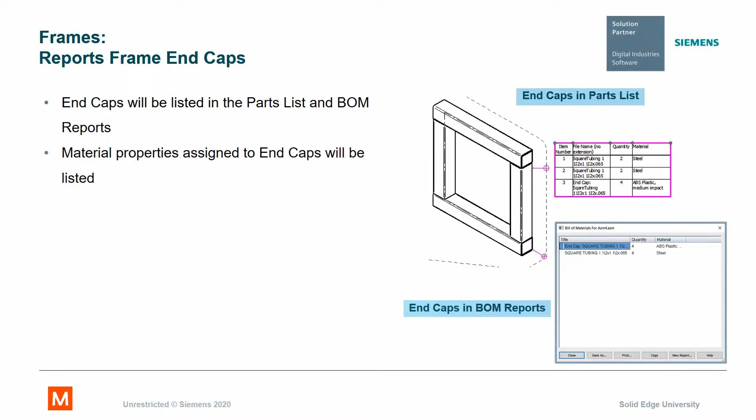It looks very thorough. I love these saved settings options that we're seeing in a lot of the dialogues, if not all of them, where once you have a certain set of preferences, maybe for one of your customers, you can give it a name and click save, and it will save those presets out and you can recall them later to save time. Some examples of end caps that you can create. They show up in your reports in your drafting environment. And I have 3 demonstrations to show you.

All right, let's take a look at the frame end cap command. We are in the frame environment, as the little close frame button proves. Notice it shows up in our predictive toolbar also. It's always a great place to look first for the command, so you don't have to switch tabs. It's probably right there trying to predict what you might want to use next. I've gone ahead and run through this once before and used a saved setting.

Just a little reminder that we have that capability, and we could individually select ends, or you can certainly fence select if there's an opportunity for that, and we'll apply. So that's probably the easiest, or maybe a common type of end cap. It's using the cross section of the frame to determine how big that should be.

Notice it gets the corner treatment from the frame section. And if we wanted to deviate from that, it's simply a matter of unchecking that. We may want to do something like create an offset internally or externally.

For example, if you wanted to create what would be a pad, like a foot, that would be easy to do. We'll do outward and we'll flip it. You see the icon change a little bit there, and we'll grab one of these cross sections and choose apply. So you see that's a really easy way to make a little foot.

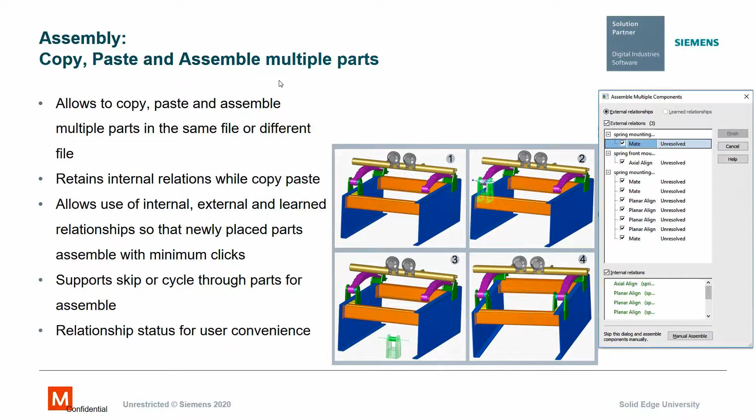So this is kind of the workflow. I think the best way is to see this in the demonstration. So the internal relationships are in the lower area, and the external relationships that need to be satisfied are in the upper area. So let's jump into a demonstration.

All right, let's take a look at copy and paste capabilities in Solid Edge 2021. This is a really nice enhancement, super easy to use. Here we have a design that we've built previously, and we think that we can reuse some of these components on our new design, which would be here. And they essentially will cover up the mechanicals on the left and the right side.

So normally you would go and use the typical place part. You could certainly use copy and paste like we used to, but this has been much improved now. So we select just the components that we want and just plain old copy, Control C on the clipboard if you like. And then we switch over to our other part.

This could be all within the same assembly, or it could even be separate assemblies. Now, instead of pasting with the button, which will work, the components drop where the mouse pointer is. So I really prefer placing my mouse on the screen at a convenient location and then do Control V.

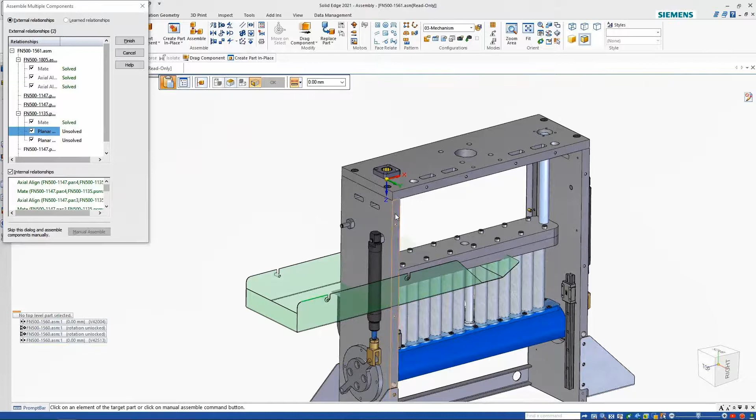So this is very much like the workflow if you placed a part with capture fit, except it's taken to the next level. And now it's moved on to the other components where it wants the side for a planar. There's a little green edge highlighted right there, so that's going to coincide with a planar alignment to the back face, and then another planar alignment up at the top.

Again, if you didn't have a face, weren't quite sure what you wanted to do, you could just uncheck that relationship. In this case, it's super easy to just pick that, and the dialog dismisses, and what you're left with is just traditional assembly relationships. And you see, if we select one of the screws, that all the internal relationships were maintained - it's associated with the PSM file that was brought along. So there you go - really easy to use and powerful new copy and paste capabilities in Solid Edge 2021.

So the ability to locate parts that are not active has been added in Solid Edge 2021. There is a button to activate it, so essentially the need to activate parts as you work has been reduced. We still have the improved performance through memory, lower memory usage, but much improved usability by reducing the need to activate parts. How they achieve this magic, I don't know, but it's nice.

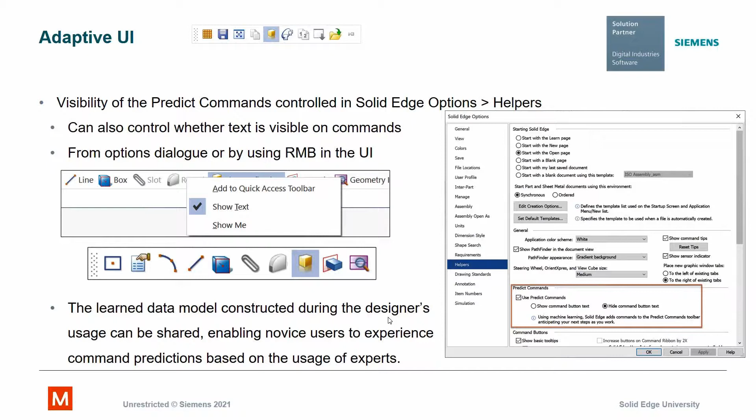And decals, super nice addition. This was a little bit steppy to do this kind of thing before, so a dedicated command has been created. You simply select the command, select the image, select the plane, project to faces. Super easy to use, kind of an ordered workflow, and we'll give you a quick little demonstration of that coming up now.

Okay, let's put a decal on this part. Decal command is right here. We're in the ordered environment. Pick a plane, browse out to my image - got a variety of file types I can pick. I'm going to use the transparent color that's right in the file. Choose OK.

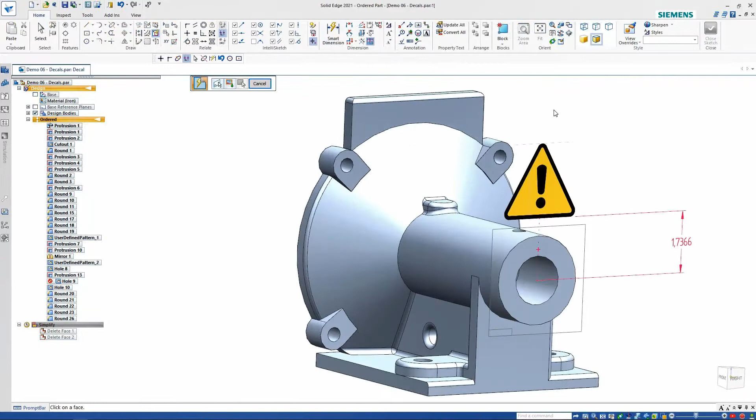We'll resize it, and then drag it, place it. And a little bit smaller. Geometric relationships completely supported - dimensions. Close the sketch. Select your targets, right click. Adjust with dimensions. Super easy to use.

Deviation analysis: if you are using reverse engineering and modeling scan data, and you'd like to compare between the scan data and your resulting model, you'll like this tool. The comparison can be made between BREP and mesh, or two mesh models. It's a point-by-point comparison of the two objects.

They can be design, construction, surface, and mesh bodies, STL or JT. The UI is very straightforward. We have settings, reference object selection, and test objects. You simply select two objects, and in the results you'll have a max, min, deviation, and control over the color bar, precision, tolerance, and results information, all covered pretty well in the demonstration. Very similar to simulation stress analysis, except the red in this case means higher deviation between the two objects you're comparing.

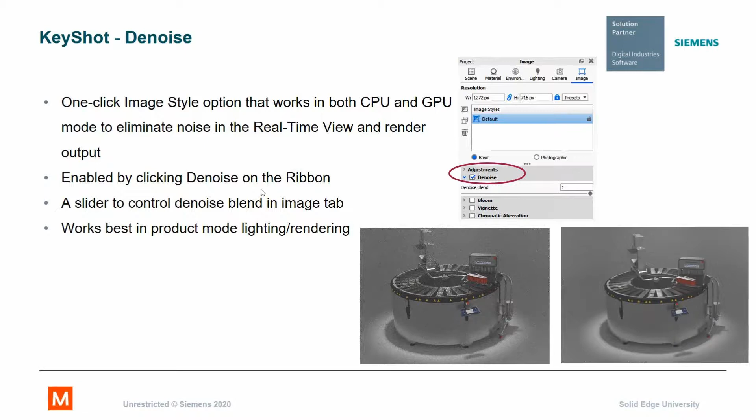An improvement to KeyShot: KeyShot now has a denoise option, one click, with CPU and GPU support, eliminating the noise in real-time view. Very nice, much nicer. And the ability to add cloth and fuzz material to your design. Very nice.

Okay, decided to skip the deviation analysis demonstration at the last minute, running a little late. Maybe we can provide that later. It's actually pretty easy to use once you've seen the slides. So we do have a question that came in.

Multi-edge flange transition to sync. So what happens when you do that, if you right click and move to synchronous, it explodes it into individual flanges. That particular feature type doesn't migrate directly to synchronous, so it's a little bit different.

And there was another one. Synchronous mode, yeah, so decals in synchronous mode. Can you have decals in synchronous mode? Well, yeah, you can do it in either mode. It's kind of an ordered workflow, that's really the best way to describe it, but it works in either one.

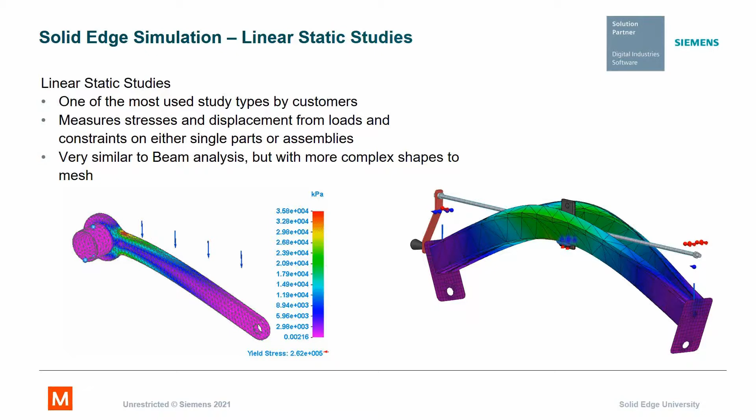And buckling analysis for very thin parts with an axial load, to determine at what point they'll buckle, for support beams and thermal studies. Solid Edge supports steady state heat transfer, which can also be used in conjunction with buckling and linear static analysis.

Transient heat transfer, and we have a really fun demonstration. All right, let's take a look at Solid Edge in action.

Solid Edge simulation. So let's apply a display configuration for just the frame components. We'll jump into the frame environment.

When you perform a simulation in the frame environment, you create a new study, and the default is beam, because it knows we're in the frame environment. So you can simply select all, or pick just the components that you want to analyze.

We'll first define a force. We want it way out on the tip, so we'll use node. And this should be, I believe, 2.5 tons, and we'll flip it to be pointing down.

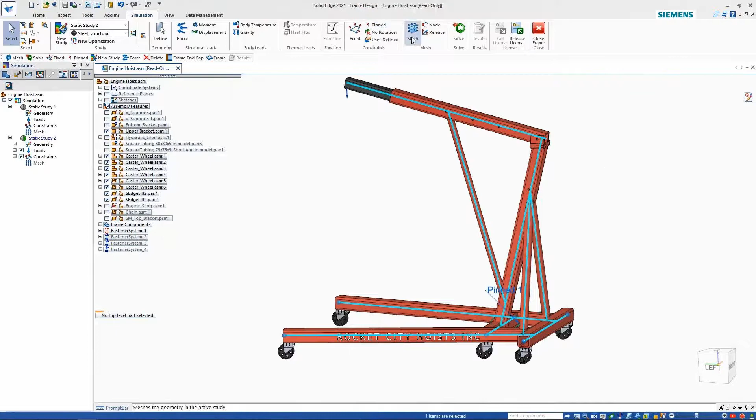So we're ready to jump into the mesh. In this case, it's a very simple mesh, the defaults should be fine. We should be able to just do a mesh and solve. You have a separate solve button if you wanted to, and it takes us right into the results view.

We'll talk a little bit more about this results view later. By default, we're seeing stress. You can also look at displacement.

This is a nice model because this actual visible displacement, if you use the actual movement and we animate it, sometimes the stresses cause so little movement in the design that you can't even see it move. So this is nice, this is 15 millimeters of actual displacement that you would see.

And that's probably fine. If we switch back to stress, one might think, well, these uprights look a little beefy. They're well within the limits. Maybe we can use thinner material. Let's take a look at that.

And the results set shows here. You can see there's another study, you can have multiple studies. We don't actually need that other study, so we'll just delete that one. So that's Study Navigator, but these members, we think they're a little heavy.

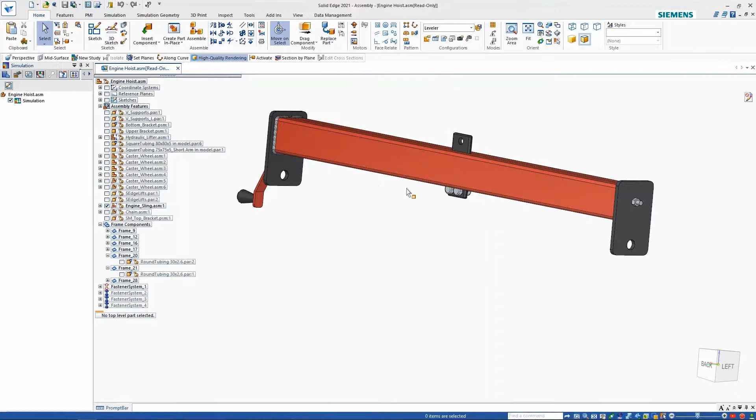We have another display config that is the leveler. So the leveler is a screw device that moves the support point. It hangs from here from a chain, and then you have a couple of chains that run down to your engine. And if the engine center of gravity is off too bad, you can basically move the hang point so you can level the engine and get it right into your engine compartment.

But this is a cool opportunity to look at other simulation geometry, because these are sheet metal components, you can use the mid-surface. So mid-surface has the benefit of performing better and sometimes producing a better, more accurate result. And this is just a nice example of using that.

And then we can hide these components. I'm just going to tap the space bar to allow me to select multiple items and hide those. So you see we just have these little purple surfaces, but the simulation works very well with those.

So now we'll go ahead and do a new study, structural steel, but we're going to choose mixed and general bodies because we're using those mid surfaces. We'll choose OK. I'm actually going to select deliberately the components, and let's take a look at the section so you can see what's going on here.

We've made a couple of flats on the rollers. These little rollers normally roll along the bottom. It allows you to crank that crank and have it actually move position.

So we didn't want just a tangent contact point. We wanted a more substantial flat. So there's a little bit of modeling that was done there, just so you know. And Control D turns the clipping off.

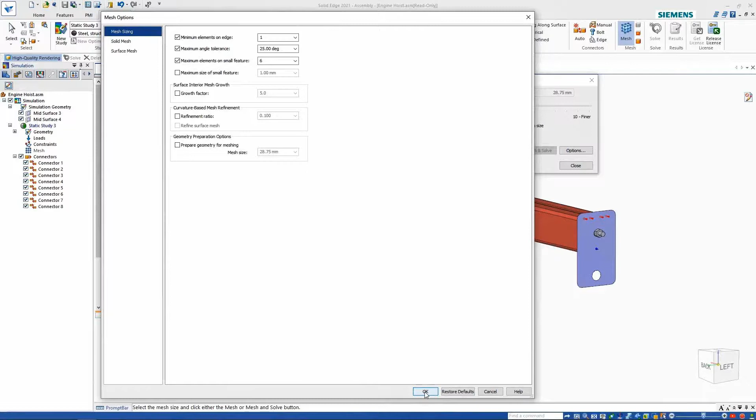And then I like to do a mesh right up front, just to make sure, in case I need to modify the geometry. Sometimes there's little pieces of geometry that are pesky, small sliver faces, things like that. There's actually a cool option here that can automatically prepare your geometry for meshing. So what it will do is find these small sliver faces that are really just going to be annoying for the simulation software and insignificant to the results, and just remove those. So we don't need that because we have a simple model, and it's just going to add extra time, and we can just mesh that.

And if you want to refine the mesh to be a little finer, it's a simple slider to do that. That may be a little finer than we need. That looks pretty good. So let's define our forces. I'm going to use the edge. Remember, that's a little surface geometry that we're selecting there. Same load as we had before.

And we'll do a fixed constraint here. Let's see, I'll do feature because there's actually a little Boolean feature in there where we made the flats. And you have nice control over the size of the indicators. Sometimes they're a little big on a small face like that. So that looks pretty good. Let's go back to meshing. And I'm going to choose not to show the mesh and then just do mesh and solve.

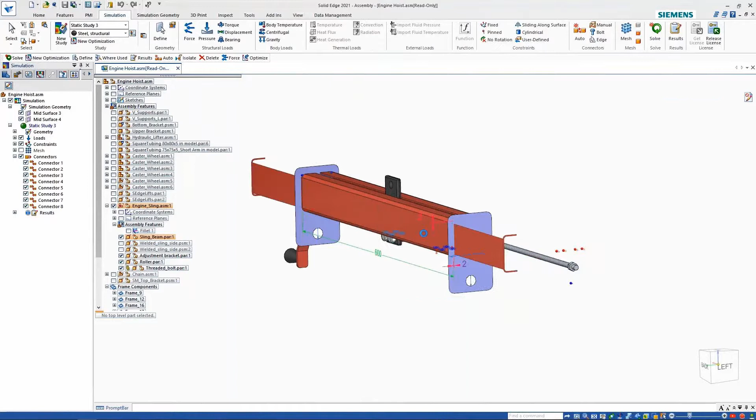So we've got quite a bit of deflection here. We're a little uncomfortable with that. We want to do one of two things. We want to either shorten the bar, which would be unfortunate, or we increase the thickness of this member. So I just did Control Spacebar, by the way, and I'm going to reach into this part, and this was made in synchronous modeling, so we have quick access. So let's say maybe 600 for length. And then maybe a 3 millimeter thickness. And then we could analyze that again. And then you could spend all day doing this until you finally found the one that is optimal.

Well, Solid Edge has the ability to create an optimization and do that bulk work for you. You simply create a new optimization and define the objective. In this case, we might say, well, we only want 1 millimeter of deflection out there. So let's shoot for that as an objective. And then the design limits, we don't want to exceed maybe a von Mises of 190, which I think has worked well for me in experimenting with this.

And the variables that we're going to push around to see what the best solution is are the two variables that we just modified a minute ago. So we're using peer variables and simply selecting the two that we want. Notice there's a range. That's just standard variable table technology that's been in the software for a little while now, but it gets picked up by the simulation software.

So it's going to work within that range to find all the possible solutions, and it's going to try 10 times. You could change that value certainly, and then the convergence parameters control when it's done, essentially, is kind of the way you would think of it. And I like to save it. You could definitely hit optimize, but if you save it, you can come over here and do some more work, and you can do multiple optimizations, but you can just right click and optimize.

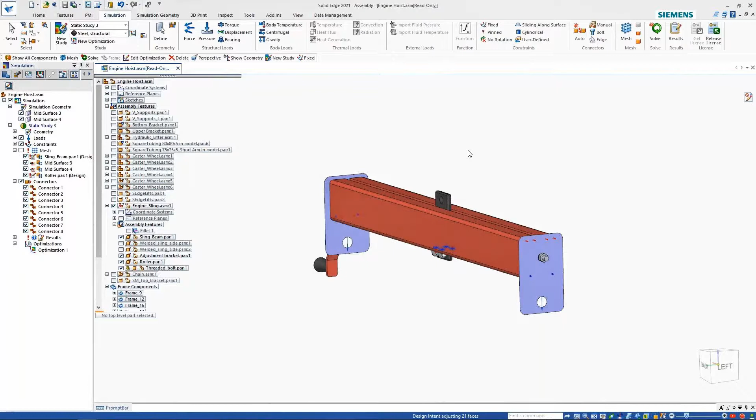So there may be materials availability, there may be weight concerns, things like that, or we want the length of this to be long enough so it can handle large motors, but yet we want it to be stiff enough so it doesn't deflect enough that the bearings get a little unstable, but yet we don't want to overbuild it either. It would be really easy to completely overbuild this whole thing, except it would be really heavy. Shipping costs, material costs, and just the annoyance of moving around such a heavy piece of machinery. So we're getting near the end here.

One more to go. Actually pretty fast, I believe. This is the kind of thing on a larger assembly you might let run over your lunch hour, or you run a few iterations to make sure it's going to work okay, and then let it run all night. And in the morning, you'll have some nice options to take a look at.

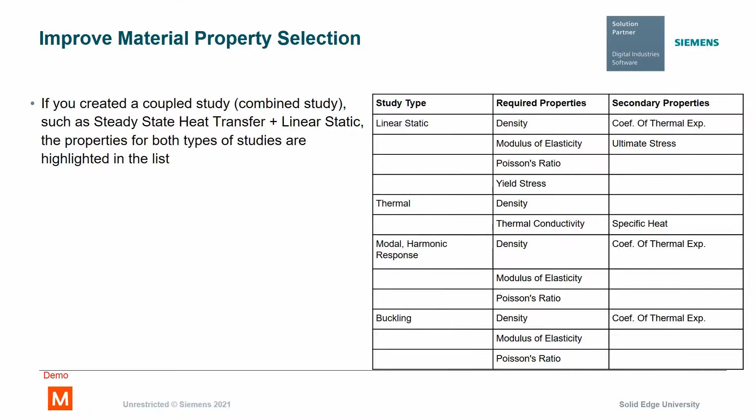And we have some what's new in simulation for Solid Edge 2021. Improvements for highlighting simulation properties that are required. This is a really nice little enhancement. It's going to highlight things like density, modulus, yield stress, things that are required to get a successful simulation. And if you create a couple of studies, such as steady state heat transfer and static, they're both highlighted. And we have a short demonstration for that.

Here is a small but very nice enhancement in Solid Edge 2021. If we take a look at our simulation, and maybe you've encountered this, if you attempt to solve, the solve cannot complete because Poisson's ratio and possibly other bits of information are not set properly in the material table. So if we double click our material table, this could be because you're using a legacy material table that you've been bringing forward. So there's a nice little toggle here, and in the darker green we have the information that is required for this type of linear static simulation that we're trying to perform.

And then in the lighter color, we have other information that may be useful for other types of studies. So maybe you should fill that in as well. So you see the density is 0, the thermal expansion is 0, Poisson's ratio is 0. So this is a little toggle here, and it is sticky. So if you turn it on, it will stay on. And then you would just need to fill in that information. In this case, I think I'm just going to go and pick a different material and apply that to the model.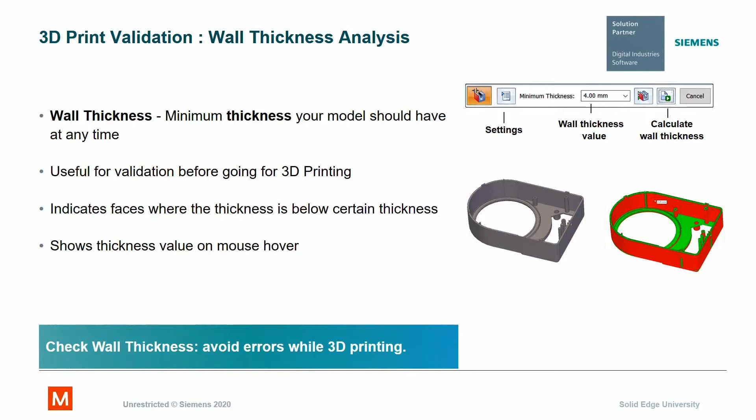It's a really great capability. You can toggle from cosmetic to physical and then back to cosmetic when you're finished printing. Wall thickness calculation, super easy to use. I'll show you this in the demonstration. You want to validate before you spend all that time and material 3D printing. If you hover over a face, you'll get a value for the thickness. Apparently, this is a very common failure point for 3D prints, according to the service bureaus.

Overhang is a common problem with certain types of printing, and we have validation tools for that. So you might rethink how you're orienting in the print bed, or rethink your design possibly. And internal voids also have their own issues, especially with a powder bed machine. You'll end up with material captured in there, and you really don't want that. So the software will detect internal voids for you.

And the ability to reorient the 3D model in your print zone, super handy. I'll show you that in the demonstration, especially when you're overcoming your overhang problems. We can import OBJ files now and work with those, multiple or single mesh, and export OBJ files as well. Some 3D printers like those file types.

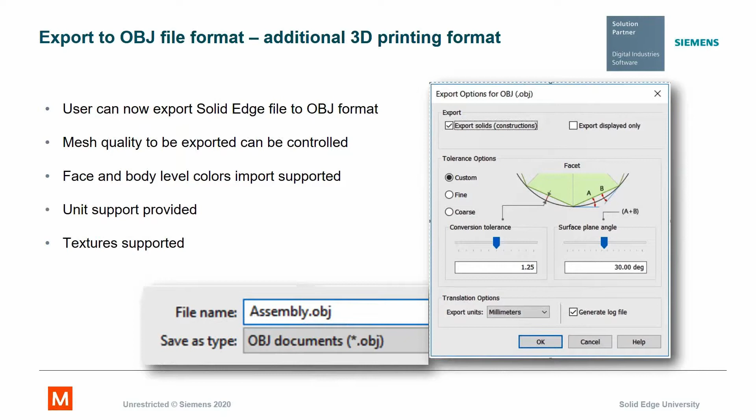You can now also assign a specific print material. I'll show you that in the demonstration. It can be different from the material assigned to the model, which is sometimes the case if you're doing a prototype. Super easy to do. Open the material table.

And there's a really nice validation tool that combines the overhang, the wall thickness, and also things like non-manifold regions. Very nice final check before you submit that to a bureau or send it off to your printer. Really great addition to the software. It's converted to STL in the background, depending on your settings for coarse or fine.

So here's a cool little part. If I wanted to 3D print this, I may want these big threads to be physical threads. They're pretty good size, so we could use the physical threads command here. You get a little bit of a warning that this could be a graphical performance issue if you have many of these and you consume them in an assembly. So you'd want to simplify them, or just think about whether you want to use them or not.

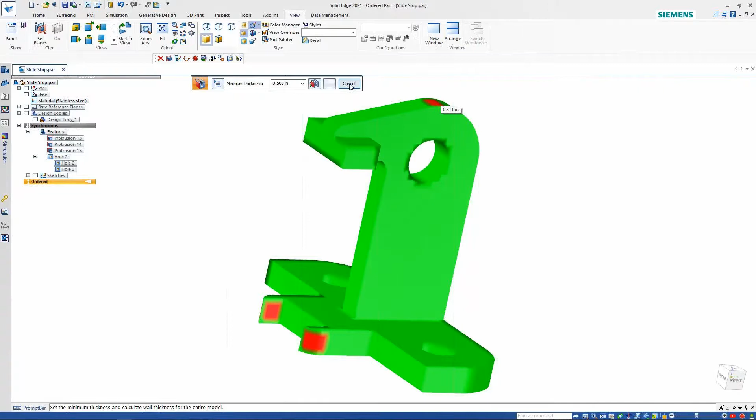Overhang is an issue depending on how you orient it in your build area. This is a pretty serious overhang; if this is going to be considered my floor, the hole will be okay. So that's fine. If we want to set the print material, that's just a matter of one button, choose the material, and hit OK. And so that would be available downstream or for reference if you were to hand this file off to someone else.

And if you wanted to see how to add that material, it's pretty well documented, but if you go into your material table, we should have some non-metals, plastics, ABS. So you see I've just added a custom property in here and set it to yes. It's just a text type. Real easy to do. So we'll look at the print validation in a second, but let's orient this for optimal. Let's do a rotate.

Okay. 90 degrees, lay it flat, pretty good. So check this out. When you cancel, it restores the model. It doesn't actually rotate the model. It does it kind of in the background, which is really kind of nice, because now when I check the overhang, it's going to use whatever I did.

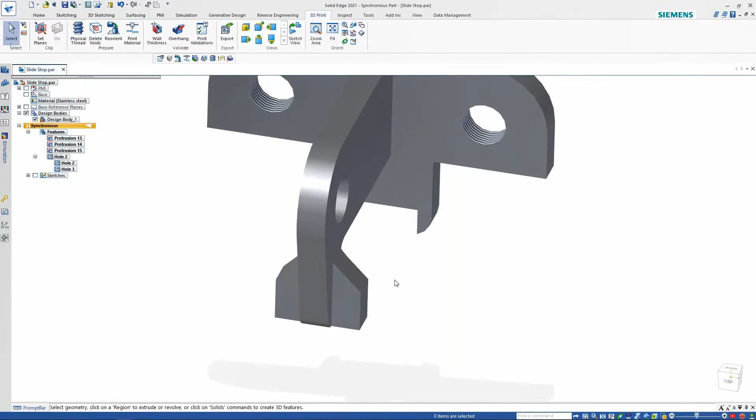So now I just have these little flat faces in the back to deal with if I orient it that way. And synchronous modeling can deal with that. We'll just select the face, position the steering wheel, and tip it. If you have the design freedom to do this, it's a great way to avoid these overhangs, and it's crazy fast with the synchronous technology.

This thing was also a little thin, if you recall. So again, synchronous wins the day. I'll give this a 0.4 because it needed to be at least a 0.3 inch thick. Did I do that right? I think I did. Yep. It doesn't really matter. You get the point. Super easy to make edits with the synchronous modeling.

And then when you're all ready to go, you can run your print validation. So this is kind of a tool that gathers these things together, the wall thickness, the overhang, adds things like non-manifold, and you can just compute that. And it finds all our regions for us. And so you see that we fixed the wall thickness. So there you go, a little 3D printing.

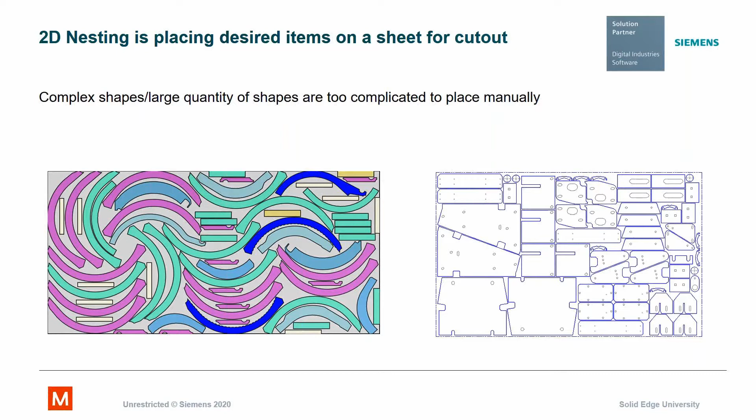So software wins. Now, when you really get into complex shapes, that's where the algorithm really shines. It can do a much better job than the human can do. The shapes that are nested are actually 2D shapes. So these can be obtained from the Solid Edge models, but you do need 2D shapes. Essentially, the software extracts them to a 2D from the flat pattern. So it's a very powerful algorithm. Automatically extracts the flat from your Solid Edge models.

It also can import neutral formats if you have some legacy data. And the occurrence quantities, if you do open your Solid Edge assembly, it can glean the occurrence quantities from the assembly. And there's a job multiplier if you want to run more than one set. That is good to know for the algorithm, because it may find a more efficient way to do that if it knows it has to make 10 sets. And there's a great cost estimator also, and a detailed report at the end.

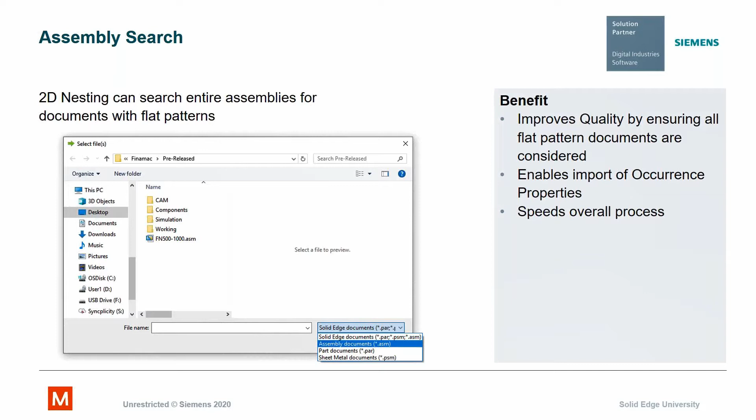And, as I said, you can just simply open an assembly file and it will go find all the parts or sheet metal parts that are appropriate for use in the software. It will then gather up your materials so you can process one sheet at a time, one material, one thickness. And, as I said, it will glean all the part counts, and you can very easily multiply them to up your quantities. Very productive.

Cost estimator is super simple. Just give it a value for the cost per square meter, for example, and it knows all the square inches and it can give that to you. And there's a report output about everything that happened during the whole process, so you can verify if something got skipped for some reason, or do whatever you want with that log. So now we have a nice little demonstration that's going to go into that all in detail.

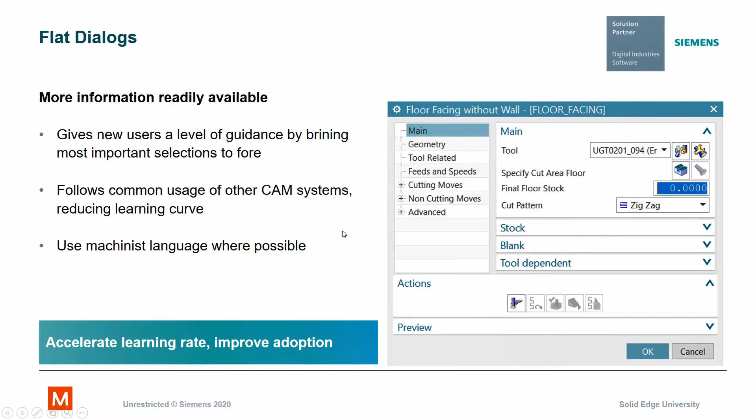Solid Edge Cam Pro is up next. Really nice improvements in the user interface. The dialogues now are an Explorer style dialogue. If you want, you can convert old dialogues to be that new style. Very easy to navigate. There's actually now a search field at the top that I'll show you in the demonstration. Really great improvement.

Chamfer milling has been added. It's a very common type of operation, so they created an operation type specifically for that, for prismatic parts. Associative, of course.

And the in-scene selection is very powerful. It's always been very powerful, but now it's much easier to discover and use using the pop-up in scene. I'll show you that in the demonstration. Very verbose tooltips as you hover over the controls to help you understand what those settings are for, to avoid too many trips to the help documentation as a new user gets started.

High-speed machining technology included, no extra charge. World-class technology now includes bottom-up cutting and safe pillar removal. I'll show you a little bit of that. It's very cool.

All right, let's take a look at Solid Edge Cam Pro. We saw this part earlier in a demonstration. We're going to send this over to Cam Pro for machining.

I had Cam Pro open, but it will open it for you if needed. You get a dialog that gives you an indication if you've added any components, if anything's changed, but this is how the interoperability between the two softwares work, so that you're able to go back and change your Solid Edge design and then just push it over to Cam Pro, and it will update the tool paths without you having to reselect any geometry. So we'll initialize this for manufacturing.

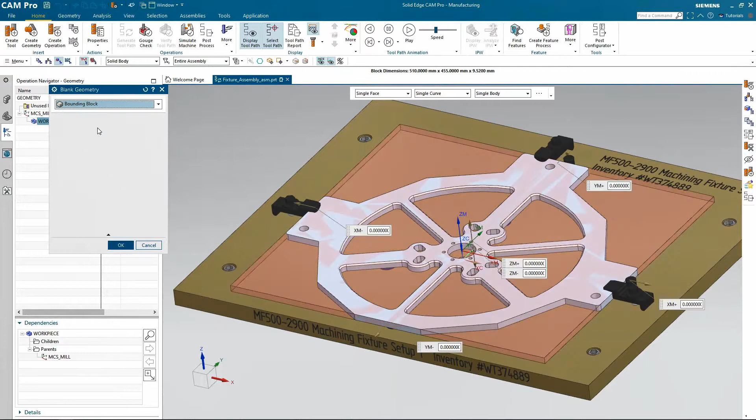Define the workpiece. That's just my part material, and the blank can be a piece of geometry. If you have one, it can be offset from the part, or in this case, I think a bounding block will probably work pretty well. So we'll go with that because it's easy. We'll show you a little bit more later.

Check geometry is great. You can see that the icon looks a little bit like a clamp. So you can select geometry that you want to make sure the software doesn't cut into. And that's check geometry. You can select your material if you like.

And then you see in the operation navigator, this came in from my template. If I go to my machine tool view, we have a number of tools that came in from my favorite template. I have a 14 millimeter end mill, and let's go ahead and create an operation. So we have a number of pallets to default and my template. I'm going to grab the adaptive milling from my template and use a 14 millimeter end mill.

We want to cut the workpiece, and we probably want to semi-finish it. Just that easy. So at this point, we have defined everything that we need to cut, and we should be able to just generate that tool path.

This is going to be a very greedy operation. It's going to use the adaptive toolpath strategy. You see it identifies the closed areas and approaches them differently in a helical pattern. You have complete control over that, and the open areas are approached a little bit differently.

The verify, you have a couple of modes. You can use 3D dynamic. You can actually, anytime you see the toolpath on the screen, you can poke, and I'll show you that.

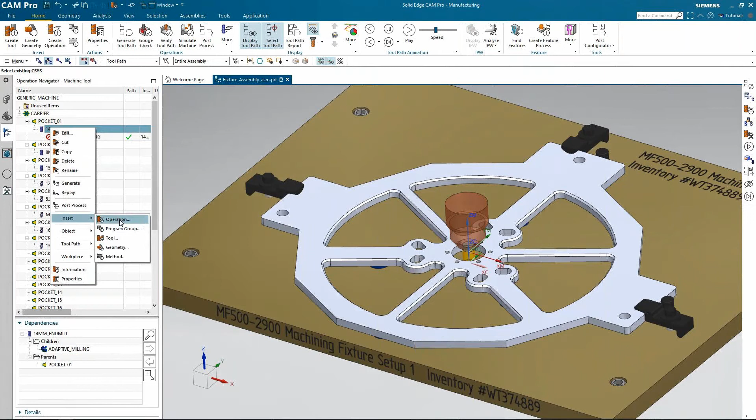I'll do an operation. We'll grab one from the standard palette, maybe. You can see there's a number of, what do we have? We have facing, we have floor and wall, pocket milling, wall without floor. That actually looks interesting.

I love these tool tips. They give you a lot of good information. Everything else looks good except we're going to go for a finish operation.

And all we need to do is we want to specify the wall geometry. And I'm going to use my in-scene filter here and choose adjacent faces and pick the bottom face. So that grabs all those side faces for me in one click.

And we can go ahead and generate that. We should see that it only cuts where it finds material because we've used the 3D IPW technique. Just hit OK. Looks pretty good.

And we'll finish up with the chamfer tool. So we'll create an operation. Let's see, my template - I have a chamfer milling that I've perfected in my template. And we have another opportunity to use the awesome selection filters that we have here.

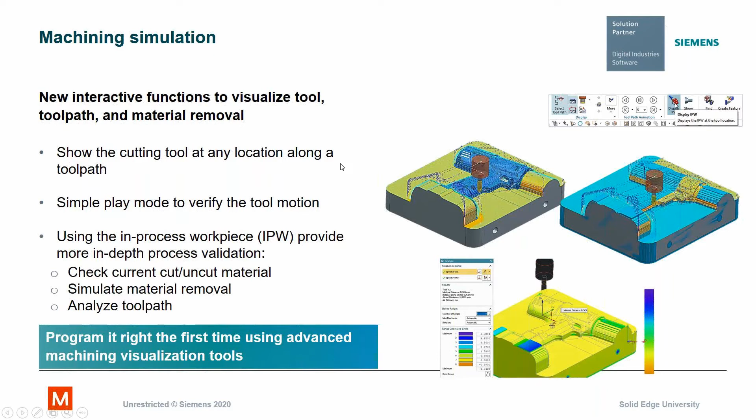And G-code based simulation. Solid Edge Cam Pro can do both internal calculated path if you don't have that completely set up, or if you have, it will post the G-code and then read that G-code back in and drive your machine tool based on that. So if you're developing a post processor, that can be very valuable, or as machines get complicated, sometimes there can be more unexpected behavior. There are custom kits that you can purchase, and there's a bunch delivered with the software.

You can have Maya develop them for you, or you can develop them yourself. And multi-axis roughing is a newcomer to the software - a very advanced bulk material removal operation. We won't do a deep dive on that, but you'll get a chance to see it, and we'll show it in combination with the verification.

Let's take a quick look at the integrated simulation and verification. We saw verification a little bit. You can verify using the entire machine tool. You see here we have kind of a complex machine and a kind of a complex aerospace type part.

We have a multi-axis roughing operation, and we're going to jump into the integrated simulation and verification. It takes just a moment because it's actually posting the code in the background, since it's going to use the actual G-code that's posted for the verification.

The code is being read line by line. Things are really tight with this operation - I expect that we'll have some collision issues. We may need to extend this tool. So right there, we have a collision of the head. It's fairly obvious, but this is a great opportunity to show you how you can just stop.

And we can go to the machine status. This is really nice - it allows you to just kind of experiment and maybe grab onto the table or any axis that you want and rethink your approach vectors.

And we can see that it stopped at line 1907. So you can just click and put a breakpoint there for next time, and you can run that through again - it'll stop at that breakpoint. So, very cool integrated simulation and verification.

Next up, post-processing. New capabilities in post-processing include the addition of Post Configurator. I'll show you a little bit of that in the next demonstration. It supports multi-channel, very advanced machines, faster post-processing for 3-axis tool paths via turbo mode, and a very nice end user interface for modifying posts.

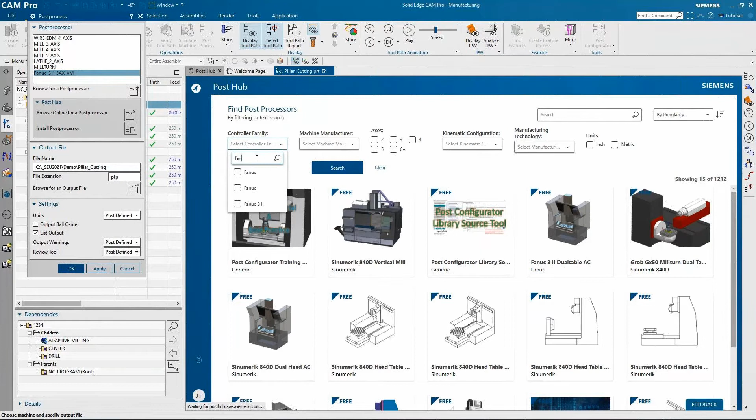I may be interested in, let's say, FANUC. Apply that filter and search, maybe just 3 axes. They've nicely labeled the ones that are free, so you can make modifications if you want. Then you pick the one that you want. There's a little information button, and there's usually some documentation. You can just simply download it, and when you do, you'll be asked if you want to just try it or actually install it. So it's very cool.

I've actually gone ahead and installed this 31i, and we'll just post to it. Obviously I've run it through once before. I chose to install it when I clicked download because I have write access to the post directory. So a lot of toolpath with that adaptive. I noticed right out of the gate that it's using an R instead of IJ for the circular moves, and I thought I'd show you how easy it is to handle that.

So we'll go into our Post Configurator. We're just going to choose our post that we want to edit, and I'm going to type in arc and ARC output mode. Right here, there's a nice little question mark that can help you even further. We're going to say circular move always for IJ. We'll say on, and save it. You can actually just post it right from here if you want to fiddle with it and examine the output.